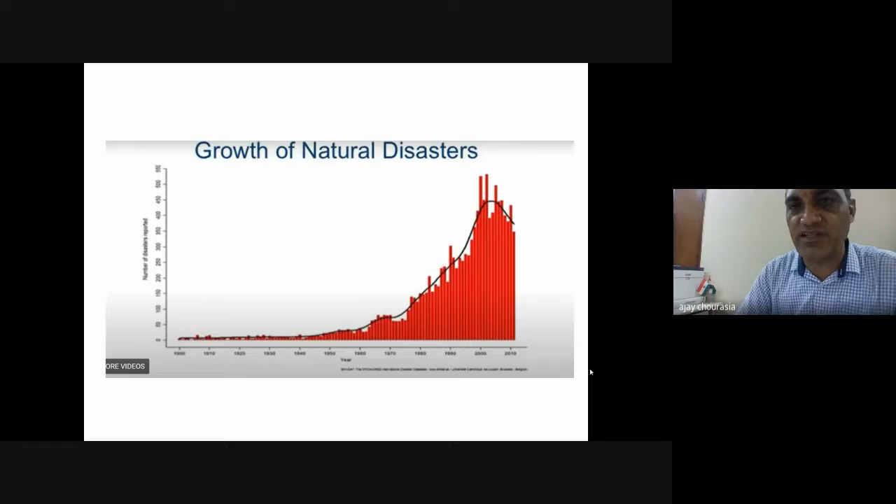In similar fashion, when you see the number of disasters happening over the last century, they are having an increasing trend day by day, and in recent times it has risen phenomenally.

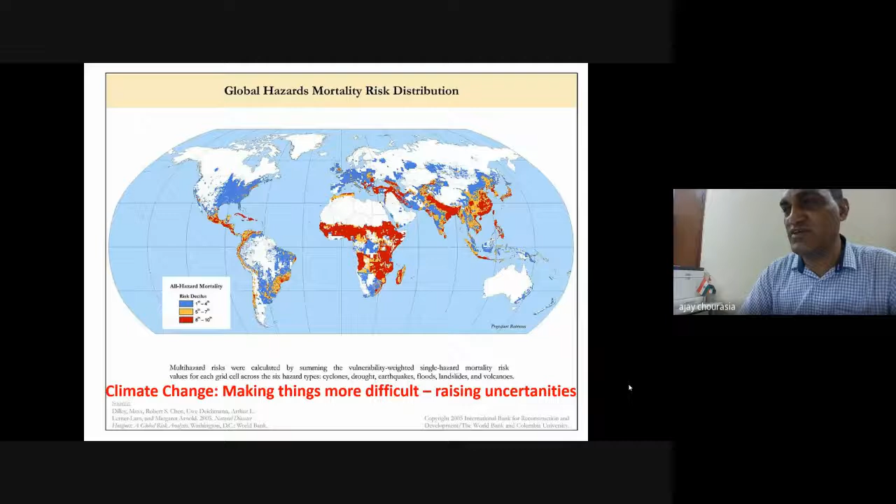In addition, the business loss cost is also incurring to a large extent, and we should focus on reducing all these things. That is where we can jump into climatic change, which is making things more difficult and raising uncertainties. We have to think differently, so that the recovery time, loss of life, loss of property, and economic losses, business losses, should be minimized or made zero.

And that poses a question to us: can we build a disaster resilient infrastructure, one which should be resilient and safe? For that purpose, this lecture or this program series is very pertinent, and will convey to you that if you are strong, you can embrace sustainability in your life, community, organizations, that you can confine the future you are looking for. You can create the future and ecosystem you want to live in. We have all the solutions on our fingertips, we just need the courage.

And if we embrace innovative sustainable solutions, we can mitigate the impact of the next disasters. So all the participants are very good ambassadors for all of us, to pass on the information, whatever has been told in this particular program, to the next generation - that is, budding engineers, that is your students.

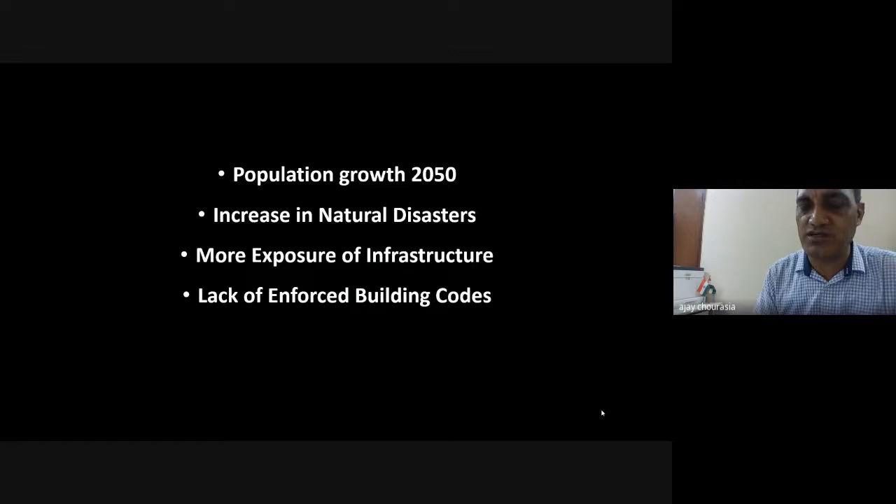So with this, again, disaster is a challenge. There will definitely be an exponential growth in population. There is an increasing trend in disasters, more exposure of infrastructure with time because developments are happening. We are moving from a developing to a developed country, and there is a lack of enforcement of building codes, which is very, very important. Keeping these things in perspective, we have to focus on our disasters.

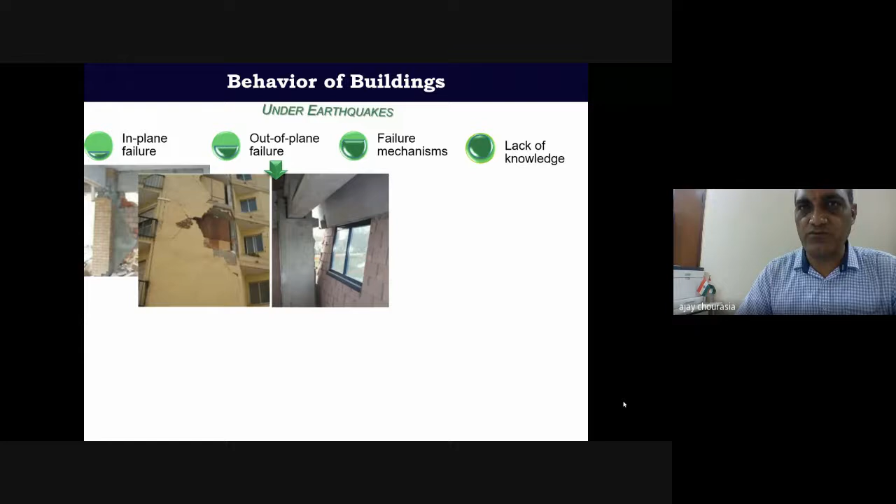In this particular topic, I will be more focusing on earthquake disaster as such. While dealing with earthquake or seismic events, I will be having more focus on masonry buildings. Whenever we have any earthquake event happening, there are common types of modes of failure: in-plane failure, out-of-plane failure. Failure mechanisms will be different, and most often we should see the damage of structural members, and non-structural members like hoardings, parapets, and so on and so forth.

That is basically a cause of concern, putting pressure on us in terms of loss of life and property. That's why there is a need to understand these things very firmly, and I've been entrusted the responsibility to take over this journey with you on masonry buildings.

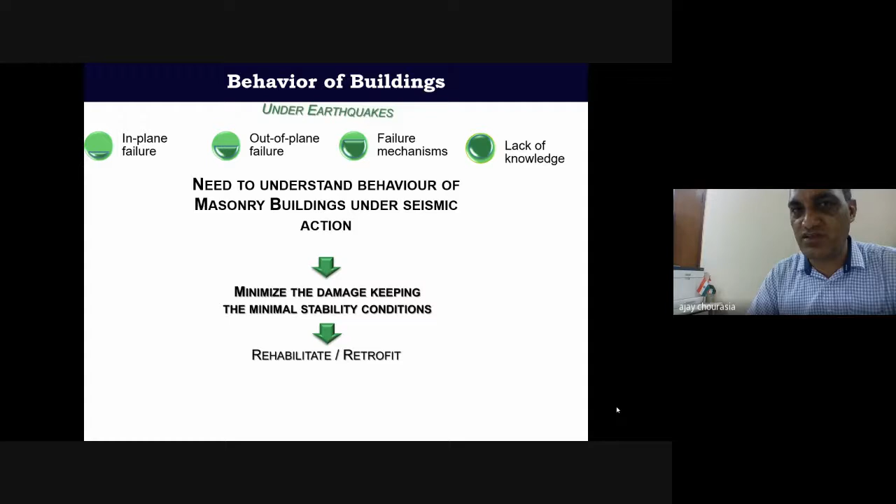Masonry buildings are very important for us because our country has 301 million existing building stocks as per the 2011 census. This is likely to increase by around 20% further if we have a census in 2021. But statistics show around 85% of existing building stocks comprise masonry buildings.

Masonry buildings are well known for their collapse or extreme failures in case of earthquake events. Whenever such events happen, if we talk about a simple typical damage pattern of rural housing, you will come across similar kinds of failures after the earthquake.

The failures may be collapse of parapet, collapse of roofing, separation of wall, shear cracks or diagonal cracks, out of plane failure at mid length of long walls, wall cracking, vertical cracks at intersections, corner failures, and so on. These are the different typical damage patterns which we normally witness after any earthquake event.

Masonry looks to be very simple and well adapted, and we are very accustomed to adopting this technology in our day-to-day construction, but it is posing more of a challenge. It looks simple, but from an engineering perspective it is highly challenging for all of us because it is a heterogeneous material, comprising masonry units, mortar, and reinforcement.

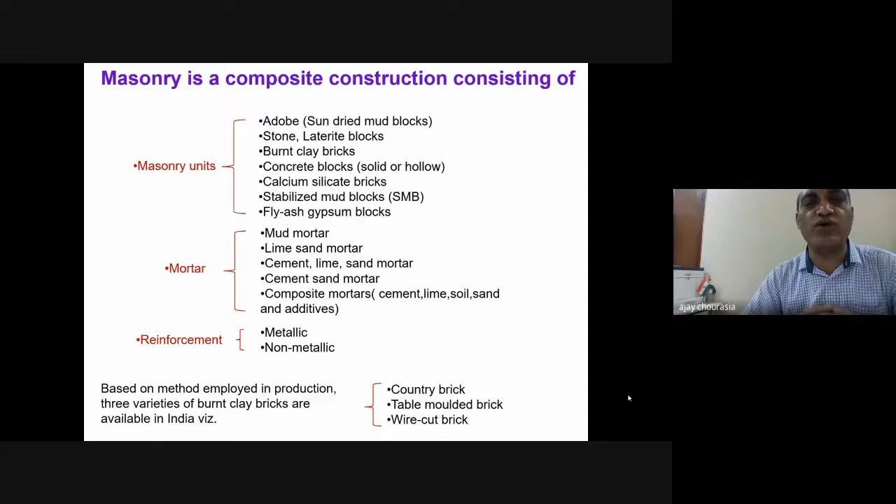When masonry units are stacked one over each other in an array, connected or jointed by mortar, which may be of different material - mud, lime, cement, lime, and so on - it gives birth to masonry walls, and combining all the masonry walls together gives a masonry building.

Ideally speaking, the seismic resistant features recommended by our Indian Standard IS 4326:2013 require providing horizontal bands to give integral box action at plinth level, lintel level, sill level, roof level, gable ends, and eaves level, and so on.

The purpose of providing a horizontal band is to create the integral box action of the entire building. One has to be very careful that this band is provided at one particular level connecting all the walls together, creating an integral box action in the building. Based on its location, it is named as the plinth, lintel, sill, roof, or gable band.

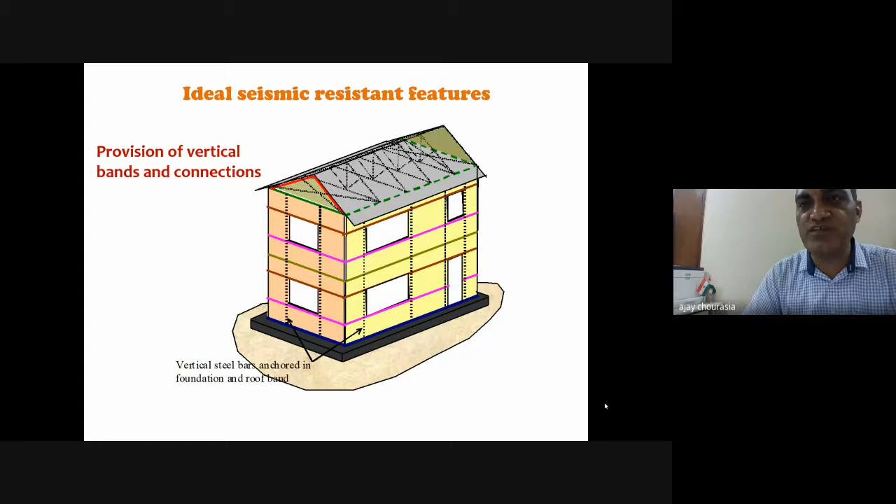When constructing masonry buildings in seismic prone regions - seismic zone 4 or 5 - in addition to the horizontal bands, we need to provide vertical reinforcement, corner vertical reinforcement at all intersections along the openings as a jamb, which provides deformability in our building systems and improves the ductility of masonry buildings.

Having said this, the motivation for this study on confined masonry is that around 85% of existing buildings in our country are masonry buildings, which are heterogeneous in terms of material properties. It's the material properties when we talk about the units, and these properties also vary from place to place, like our accents vary from north to south and east to west.

The strength of units is also changing. The mortar is also changing its properties because it all depends on the locally available ingredients and construction practices.

The vulnerability of masonry buildings has been demonstrated very badly in the past, and that is posing us to look for appropriate technology which is cost effective, seismic resistant, and can make use of locally available construction materials and skills. So for that purpose, we have to look into appropriate technological solutions alternative to masonry buildings, but it could still be masonry, because it is the choice of each and every one of us in our country.

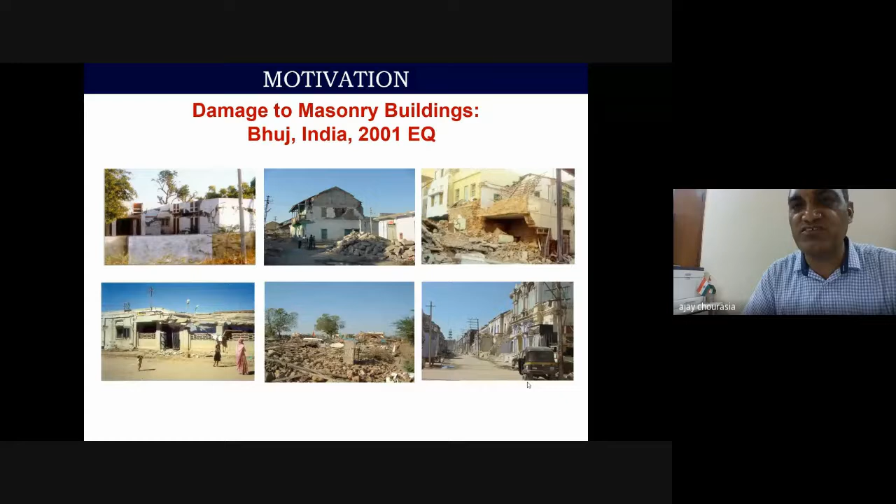When you talk about damage in masonry buildings, to begin with, in the 2001 Bhuj earthquake, total collapse was noticed in most masonry buildings and excessive damage in some buildings. And it's not like RCC buildings have sustained very efficiently either, in our country or abroad.

They also gone into lot of damage, even collapse, because of poor construction practices. That means, if you are saying that RCC buildings are robust and very good at resisting earthquake events, it is not so if not constructed properly, whether it is an RCC building or masonry building.

Before going further in understanding this, or the great insight of seismic activity in masonry buildings, let us try to understand the masonry wall first.

It is my duty, and I will also tell the takeaway for this lecture, which you should convey to your students also: whenever you are dealing with any kind of problem, issue, or subject, you should first focus on what things go wrong in it. Try to identify such wrong effects and then try to strengthen yourself, your project, your activity, your work in that direction.

In the similar process, when you are talking about masonry buildings, let us consider a masonry wall and understand what will happen to it when subjected to seismic events or ground shaking.

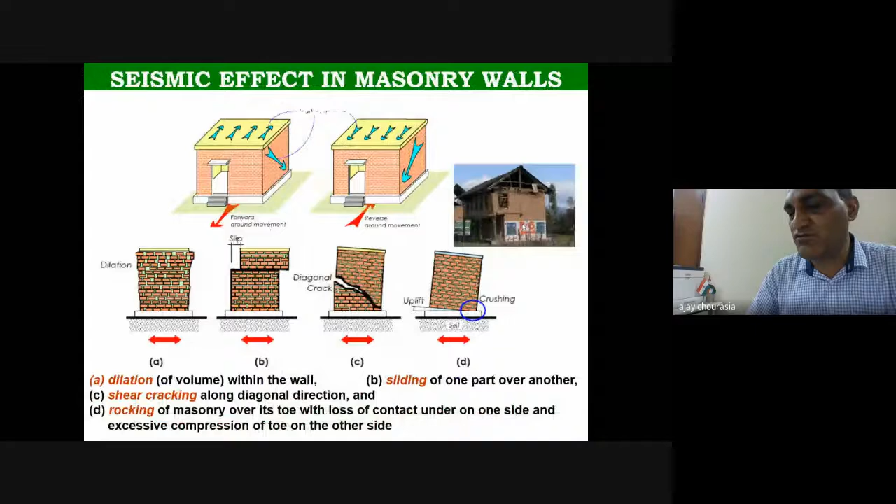As a result, if I take a bulldozer and put a lateral thrust on this, the masonry building will not undergo any kind of collapse or damage. Why not borrow this mechanism from nature and put it into our day-to-day system of construction, particularly for masonry buildings?

Instead of the tree's roots, we can make use of a lightly reinforced RC element, that is an RCC element, like a tie column or bond beam. This can be very well explained from this slide: if you have a wall panel, which is a masonry wall panel, subjected to lateral loading or ground shaking at the bottom.

So possibility of dilation when you talk about may happen, or any kind of distress mechanism as explained in the previous slide can happen.

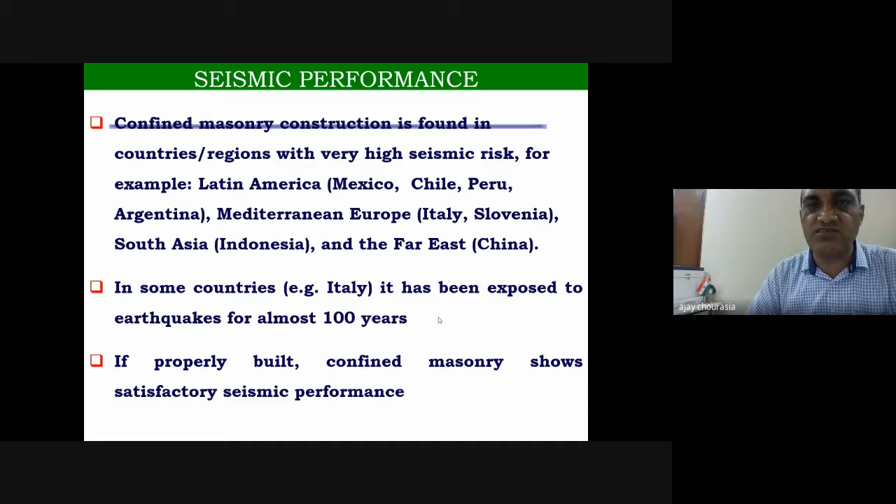With having known certain good and bad things about confined masonry, when you see confined masonry all over the globe, when it has been exposed to various earthquake events, whether in Latin America, Europe, South Asia, or Far East, it has performed exceptionally good if built properly, and that has instigated me to take up this particular R&D activity at CBRI.

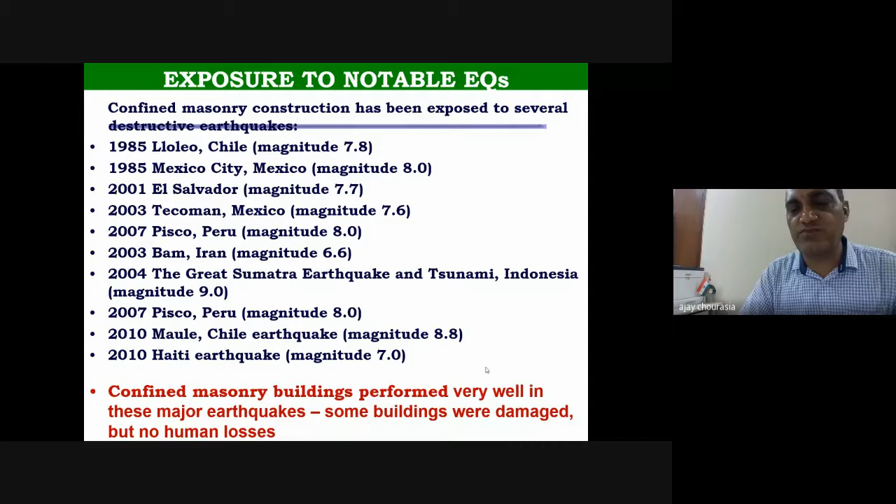At the same time, it was also noticed that when confined masonry was exposed to even extreme events like earthquakes having more than 7 magnitude, it has performed exceptionally good, and that's why when constructed adequately and properly, as has been explained in this presentation, there was very good performance of confined masonry worldwide.

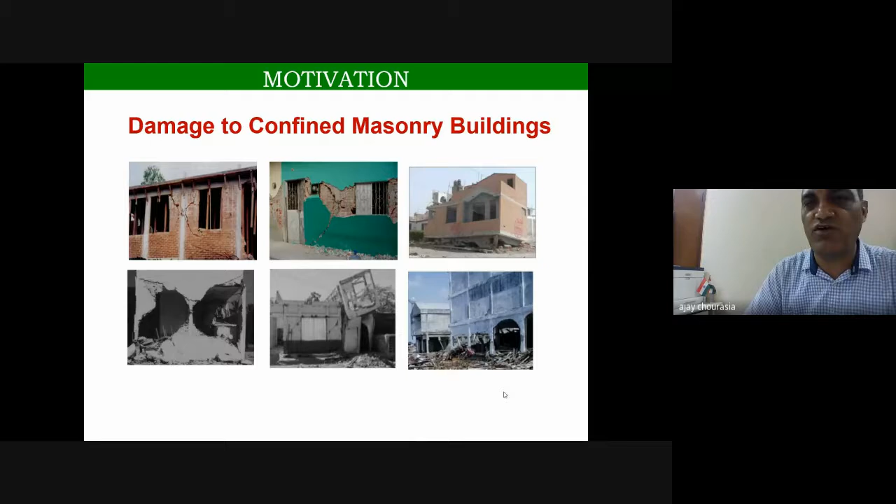But at the same time, in some cases, confined masonry also suffered excessive damage if not constructed properly, if the basic principles of construction of confined masonry were not honored. So there were mixed reactions, mixed results. For that purpose, we need detailed investigation on this subject.

When you talk about masonry, particularly in comparison of confined masonry with RCC moment resisting frame structures - what you see in RCC frame structures is that basically the RC columns and beams are constructed first, then masonry walls are laid at appropriate locations without any adequate connectivity between the masonry and the RC element.

And when it is subjected to lateral loading, shaking, what happens is that these RC elements - the RC frames, beams and columns - go under bending, and as a result there is separation between the masonry walls and the RCC frame, leading to a gap at the corners and creating compression struts and damage in the masonry walls.

In contrast, when you see confined masonry - I will come to the construction sequence later - but the failure mechanism is different since confined masonry is constructed simultaneously. Construction of masonry walls and RC elements is done simultaneously, with good bond between the masonry and RC element, embracing it on all sides.

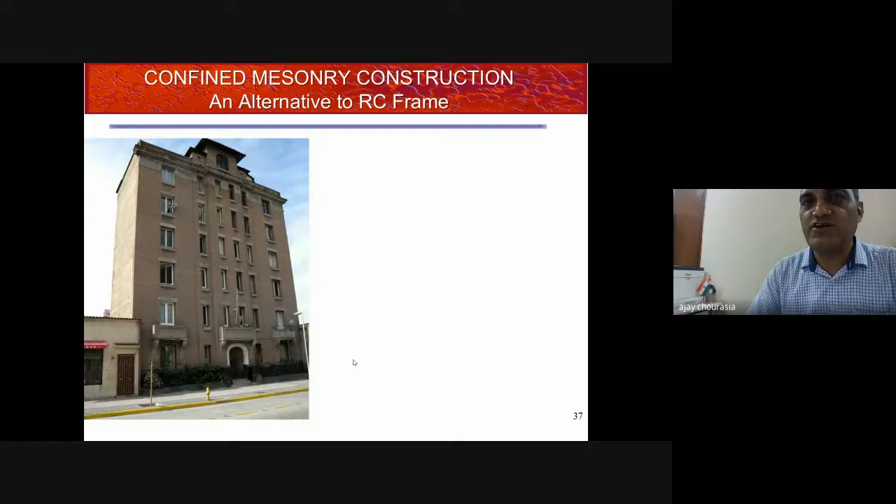So one advantage of this alternative construction technology, confined masonry, is that once constructed it looks similar to an RCC frame building, but the sequence of construction matters - the cost and other aspects are relatively less, but it provides very good seismic performance, or even more seismic performance than poorly built RCC frame structures.

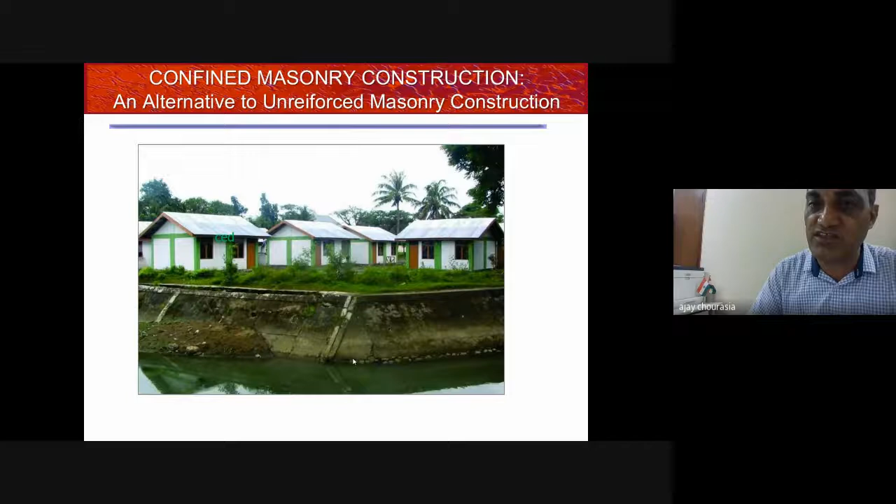So you can construct confined masonry even for 1 story up to 4 to 5 stories in even seismic prone regions, seismic zone 4 and 5. Why am I comparing this confined masonry with RCC frame buildings, which are called high-tech buildings? High-tech, why?

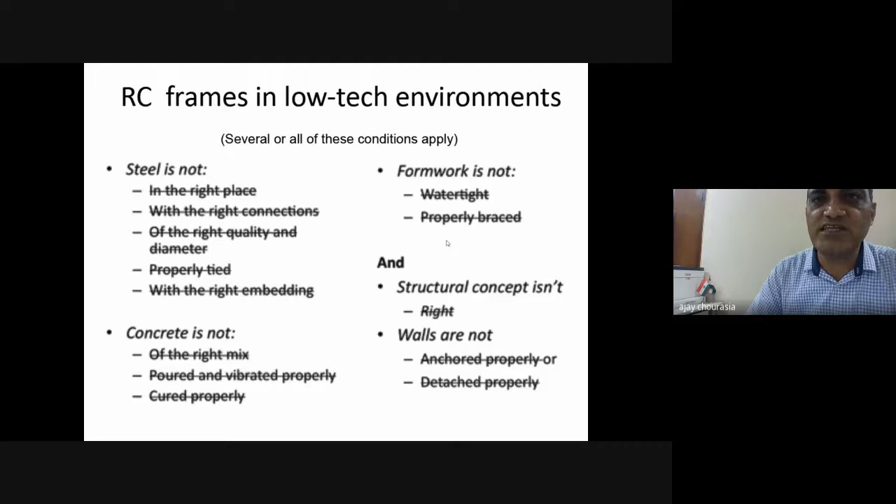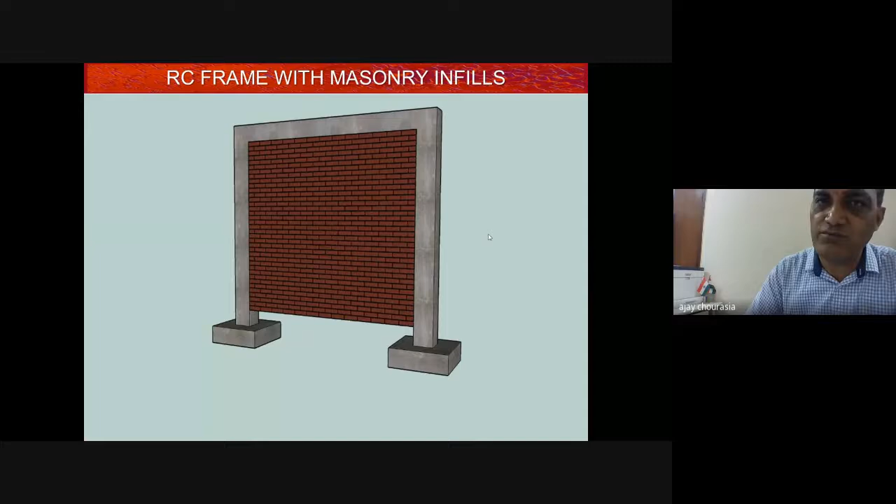In RCC structures, the sequence of construction matters. First the frames are constructed, and then masonry work is done as and when required, and that's how the RCC frame with masonry infills acts on. But there is a slight difference in confined masonry.

In confined masonry, first of all the reinforcements are erected at appropriate locations, then masonry work is done at certain locations up to certain height, maximum 1 to 1.2 meters. Once the masonry work is done up to that height, shuttering is provided at the two faces and concrete is poured. As a result, the entire masonry work is embraced by a lightly reinforced RCC element. It's lightly reinforced because you don't have to calculate the reinforcement as per the procedures given for tie columns or bond beams in IS 456 or other RCC building design codes. That's how you can achieve a good bond between the masonry and the tie column.

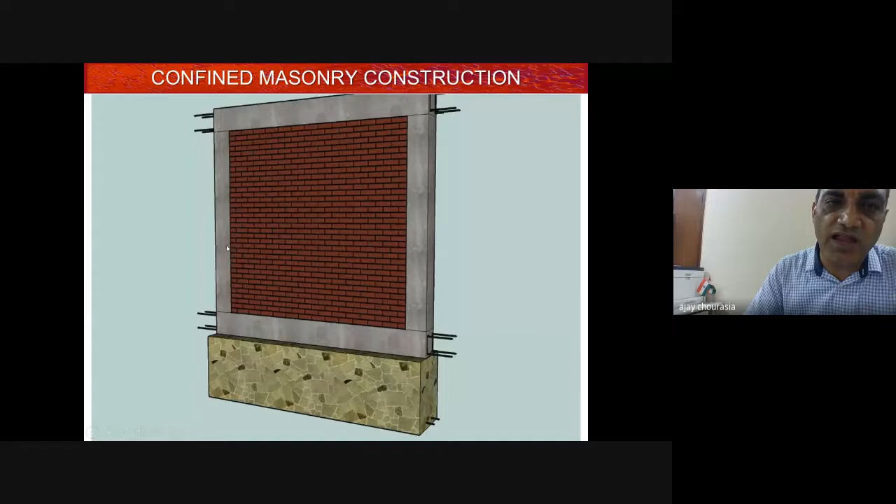Once such buildings are constructed, it looks similar to this particular building. It is neither a masonry building nor an RCC frame building, but is called a confined masonry building. What are the different components involved in confined masonry buildings?

Vertical elements are called tie columns. Horizontal elements are called bond beams, provided at the plinth level and lintel level of the masonry. When you are providing the RCC slab, bond beam provision is not required, and all these bond beams should be resting on the brickwork, obviously, because the sequence of construction demands that.

As I mentioned earlier, reinforcement is erected first, and then you do the masonry work, leaving a groove at the ends. That groove basically ensures a better bond between the RC element or concrete and the masonry works.

When dealing with these grooves, one has to be very careful that the groove should be limited to a maximum of 40 mm. If it is given more, then you cannot do proper compaction, and it may lead to honeycombing. That's why the size of the aggregate should be considered as a limiting factor, so the grooves may range from 25 mm to 40 mm.

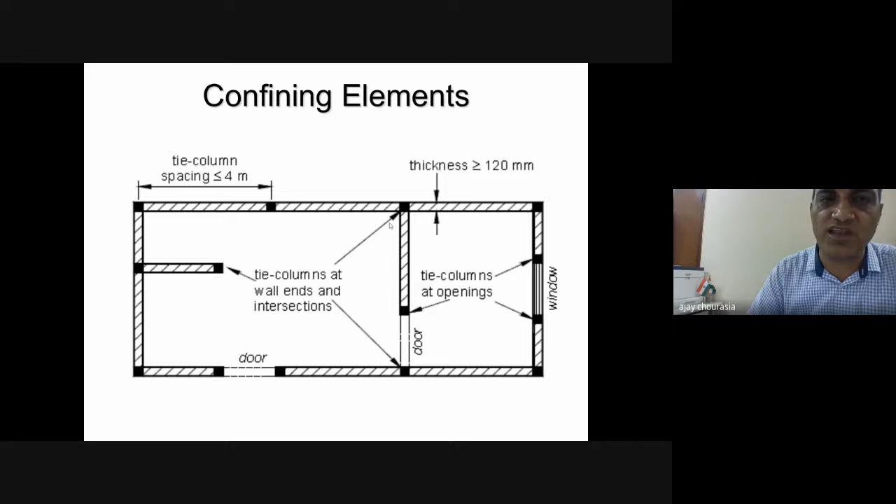Another parameter to consider is the stiffness of confined masonry buildings. For a masonry wall panel, the h/t ratio—h being the story height and t the thickness—should be less than 25, and L/t, the length of the wall panel divided by thickness, should also be less than 25.

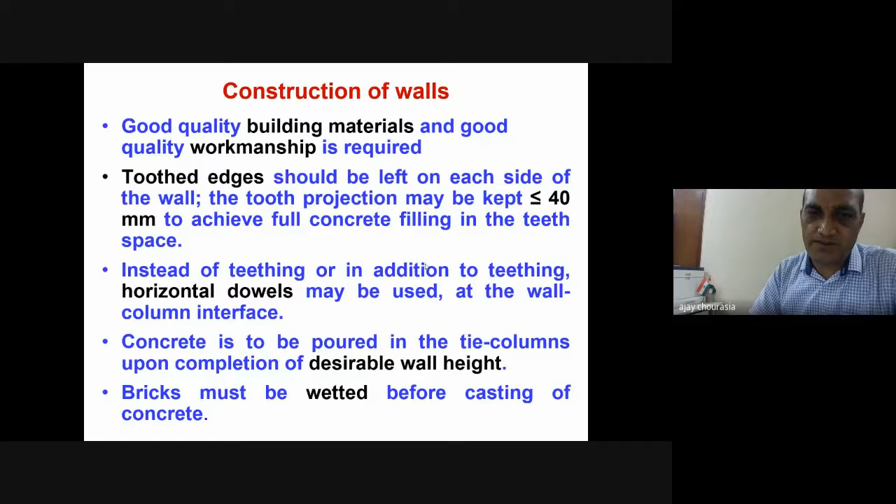For unreinforced or reinforced masonry, the L/t and h/t ratio limits are 18, as given in IS 4326. This is one of the checks you need to do. In summary, confined masonry walls should be constructed with good quality building materials and good workmanship. Toothed edges are required, as mentioned, less than 40 mm, or alternatively you can provide horizontal dowels.

Other general conditions of construction practices for masonry buildings need to be adopted. This is how you provide the shuttering: once the two masonry walls are constructed up to a certain height, maximum 1.2 meters, provide shuttering at the two edges and pour the concrete.

Other detailing: the minimum reinforcement required in the tie column is 4 bars of 10 mm diameter. Similarly for the bond beam, also 4 bars of 10 mm diameter. The lateral ties in columns and stirrups in beams could be 6 mm diameter at 100 mm center to center at the ends, and 150-200 mm center to center at the mid-span. This is from the confinement and ductile detailing point of view.

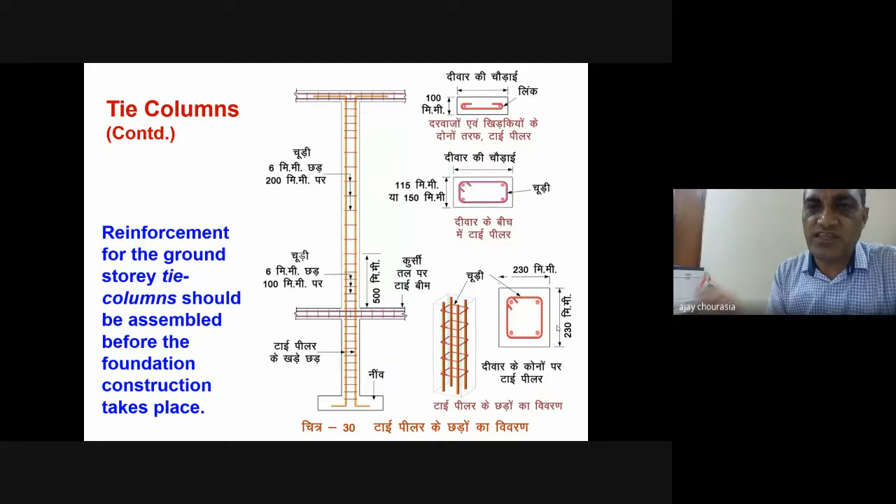Further, the ductile detailing as given in IS 13920, such as bending of hooks by 135 degrees and the length of the hooks, applies here as well.

An important consideration in confined masonry construction is the connection between the tie beam and tie column: the reinforcement of the tie beam should pass through the longitudinal reinforcement of the tie column. This must be ensured. It should not happen that the reinforcement of the bond beam lies outside the longitudinal reinforcement, as that is a dangerous situation.

In seismic events, the concrete cover can collapse, leading to poor bonding between the bond beam and tie column. To avoid this, it is better practice for the reinforcement in the bond beam to pass through the longitudinal reinforcement of the column. Additionally, dowel bars with a leg length of minimum 50 times the bar diameter can be provided, creating good connectivity between two perpendicular walls through the tie column.

Now, to have a better understanding of the behavior of confined masonry, I would like to share a video that will give you confidence in understanding how confined masonry walls, unreinforced masonry walls, and even RCC frame structures with masonry infill behave.

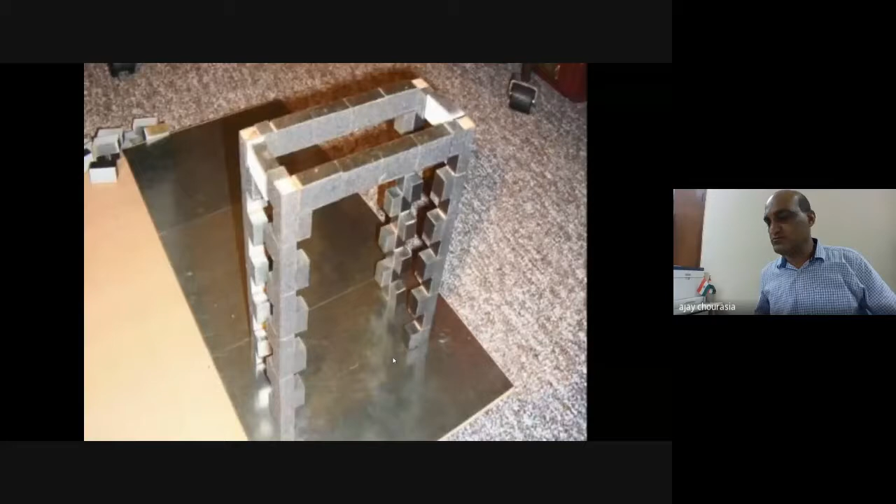Keep in mind that the reinforced concrete beams and columns of a confined masonry system are sized much smaller than those of a concrete moment frame system. So while we'll see the system acting as a moment frame, the small size of the members gives it a relatively low capacity. Let's shake these structures in plane.

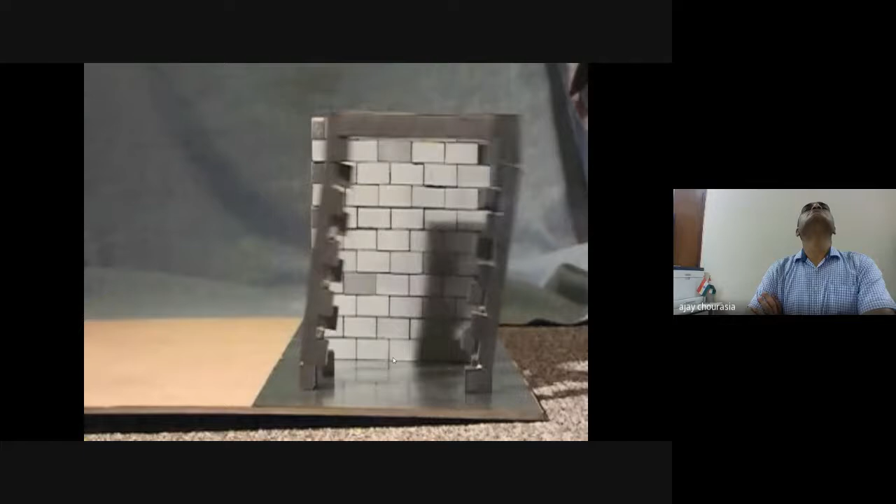We start to notice hinging in the moment frame where the flexural demands are greatest. It's important to note that though the moment frame here is yielding first, that doesn't mean a concrete moment frame can't make a good lateral system. It just means the beams and columns need to be adequately designed to do so, with sizes larger than the typical 15 and 20 centimeter beams and columns of a confined masonry system, as well as other special measures.

In the unreinforced masonry system, we see diagonal cracks forming, shortly followed by the complete disintegration of the masonry wall.

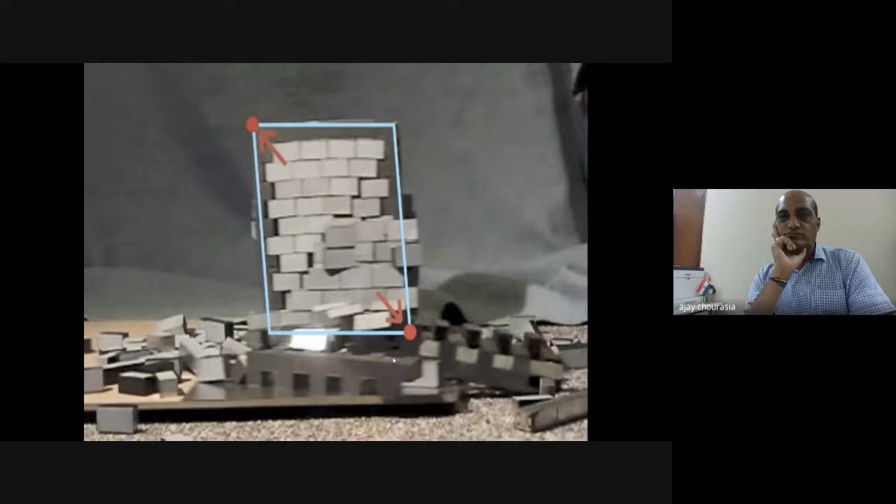In the confined masonry system, we also see diagonal cracks forming in the wall. As the wall deforms, these two corners pull apart from each other, causing tension, and as we know, masonry alone is weak in tension. Similar to the unreinforced masonry system, we see cracks develop, but the confining elements postpone the complete disintegration of the wall. Relatedly, when the wall corners move together, a compression strut forms, which is an important mode by which the seismic force at the roof finds its way down to the ground. It is the combined action of the compression strut in the wall and tension in the confining elements that allow for strut and tie action, which provides a complete load path from the roof to the ground.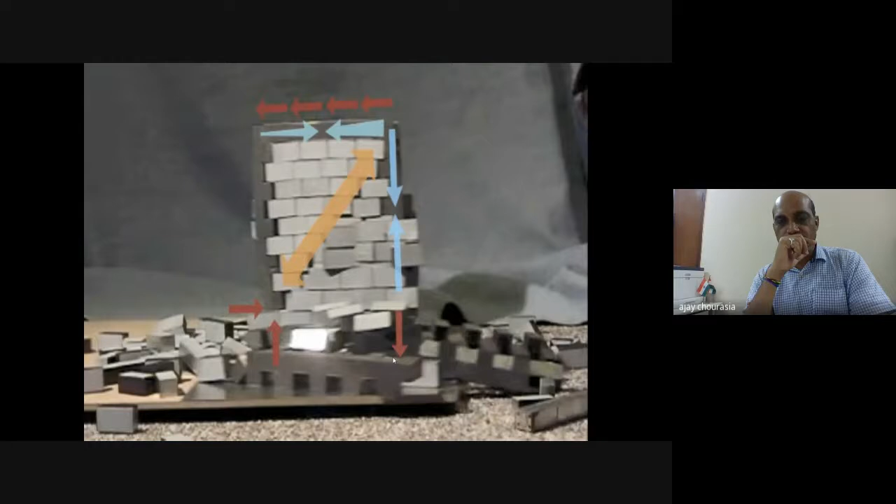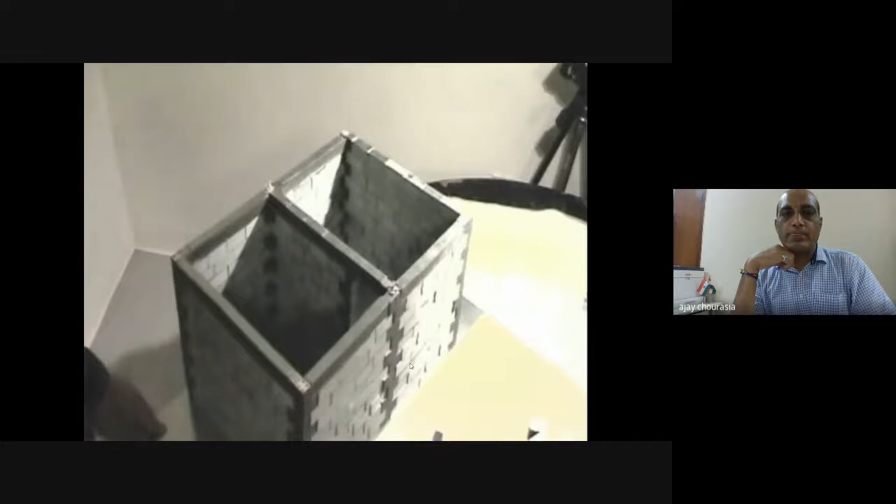We're going to look at the role of the ring beam in the out-of-plane behavior of a confined masonry wall. Say we have a structure with a lightweight roof made of a simple rafter and purlin system, which, unless specifically designed to do so, won't provide adequate out-of-plane support. So for our purposes here, we'll ignore the roof altogether. We'll take this fairly regular setup and shake it in the longitudinal direction, and we'll keep an eye on these two walls, which are identical except for one thing: this front wall has a ring beam on top, which will help restrain this wall out of plane along the top edge. The rear wall does not have this ring beam, so we can make a good guess as to which one will fail first.

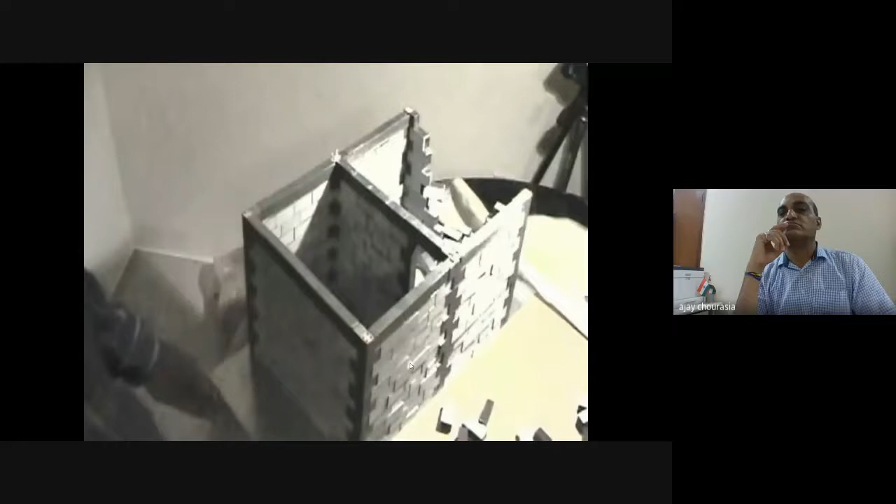Just as we might have expected, the wall without the ring beam supporting its top edge failed first, and we can thus conclude that the ring beam plays a crucial role in the out-of-plane stability of a confined masonry wall.

Now let's take a look at that unsupported wall again from a different angle. From this freeze frame, you can see cracks forming roughly in the pattern of an upside-down Y, starting near the midspan of the unsupported top edge. Of course, a ring beam would have helped prevent this failure.

So with this, I hope you have understood the concept, mechanism, and behavior as a whole of the confined masonry panels.

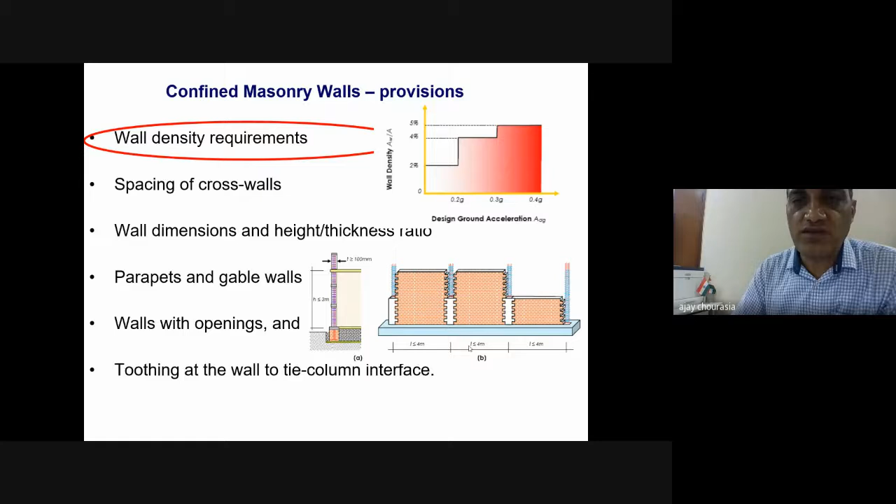Before moving on, I will quickly highlight some design steps. One has to be very careful while deciding on confined masonry construction, though you don't need very meticulous design procedures. First, some parameters one has to check or cross-check include wall density, spacing of the walls, spacing of the columns, h by t ratio and L by t ratio as I mentioned, and then you have to ensure proper connection between non-structural elements like parapet wall, gable ends, and walls with openings. Special attention needs to be paid to toothing at the wall-to-tie-column connection. These are the important provisions one has to consider when dealing with confined masonry.

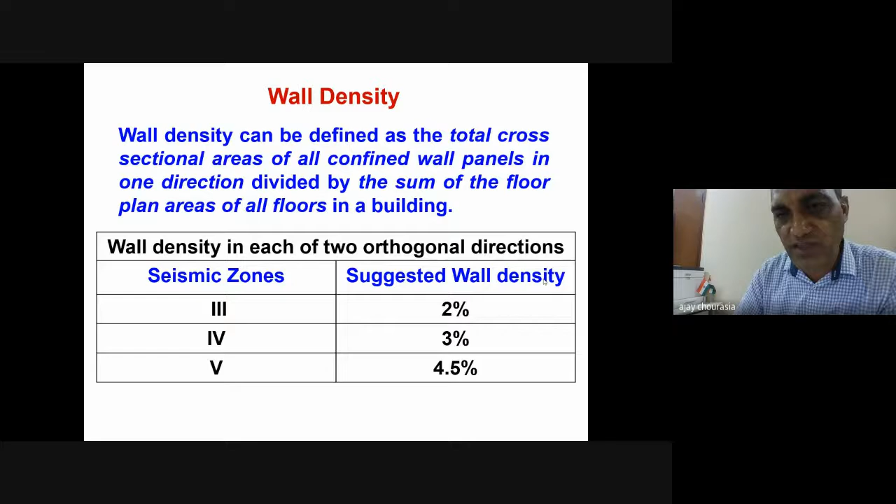Apart from this, other planning and design concepts need to be embedded in the construction of confined masonry, including simplicity and symmetry of buildings in both plan and elevation. In plan, irregular shapes are discouraged, and regular shapes are expected to perform better. If you are dealing with irregular shapes, you need to separate or break them into regular shapes, like in this picture. This was as regards to the plan.

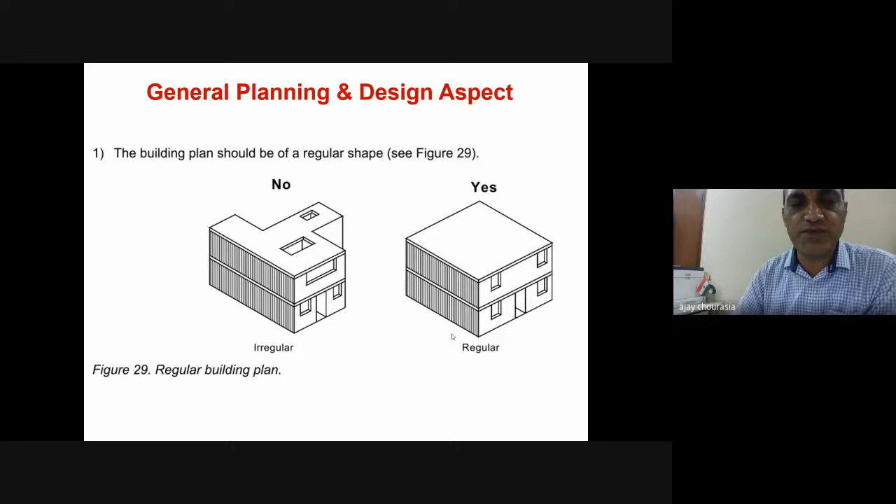Further, regular building plans are always good when constructing confined masonry buildings, because that ultimately improves the seismic performance of the building as a whole.

The building length to width ratio, the aspect ratio, is a very important parameter. The L by W, that is the length of the building and the width of the building, should be less than 4. Whenever the aspect ratio exceeds 4, you have to provide an adequate separation gap between the two blocks, breaking the building into two pieces. This separation gap can be calculated as per the provisions given in IS 1893:2016, as the sum of the maximum displacement between the two buildings. As a thumb rule, consider 20 mm per story as the separation gap. For example, if you have 4 stories, the minimum gap should be 80 mm.

Another important thing is the wall layout. Walls should be placed uniformly and symmetrically in both directions in plan and elevation, because unsymmetrical wall placement may attract more torsional effect. It's not always possible to have perfectly symmetrical wall layouts, but the layout shown on the right of this figure, while not ideal, is much better than the layout on the left. You should aim for a better layout of your buildings in plan and elevation.

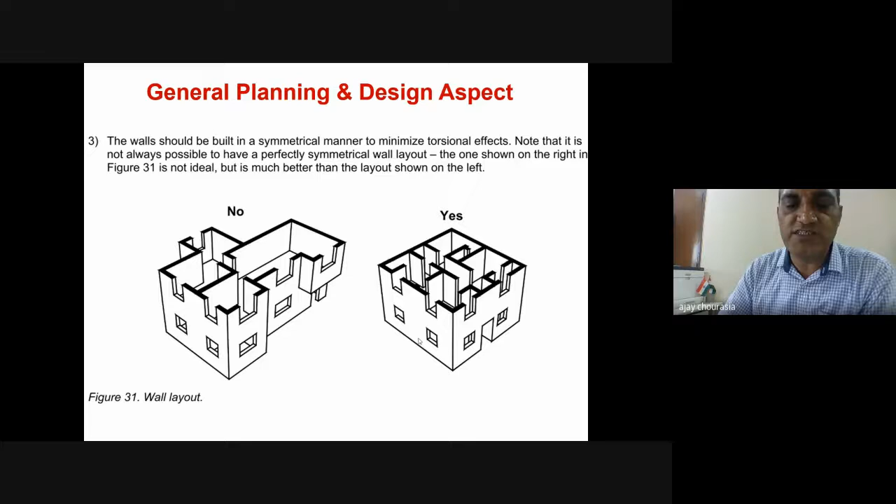You should not provide wall density or wall layout in only one direction just to fulfill the aspect ratio demand; it should be symmetrical in both directions. In elevation too, walls should be one over the other. Floating walls or unsymmetrical wall placements should be discontinued because they lead to an inadequate seismic load path. Seismic forces created by inertial forces at the roof level are transferred through the wall down to the foundations, and discontinuity in this load transfer mechanism leads to an inadequate seismic load path. So this kind of discontinuous wall should be avoided.

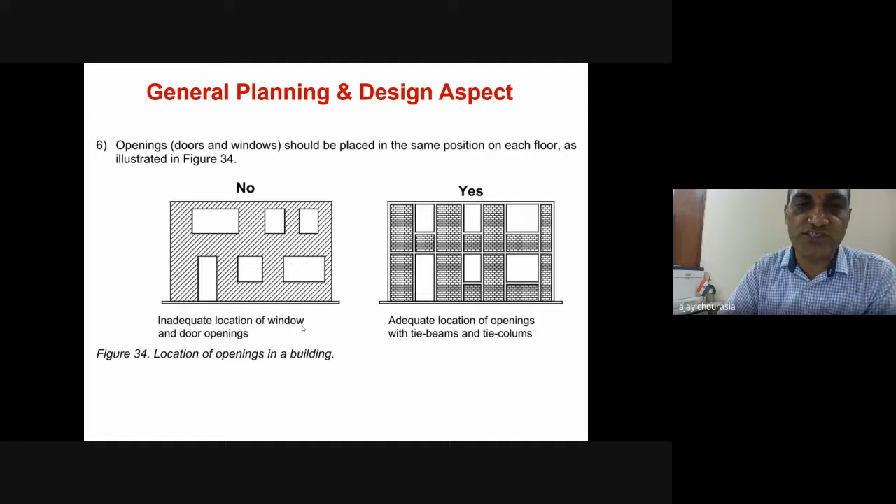Further, openings should be as symmetrical as possible along the height of the building, placed one over the other. They should not disrupt or discontinue your bond beams, so the location of openings should also be given very good attention.

When dealing with sloping or pitched roofs, you need to provide gable bands, that is a bond beam in terms of a gable roof band or gable end if required. Unnecessarily placing masonry in the gable ends will attract more inertial forces, leading to a greater possibility of overturning or collapse. To avoid this, an alternative is to cover such regions using lightweight gable panels, roof-type panels, or roofing sheets.

About the good practices, I have already mentioned that the reinforcement of your bond beam should be passing through the longitudinal reinforcement of tie columns. If not possible, if you are not assured due to certain constraints as you have seen in this particular picture B, you can provide additional dowel bars for that particular intersection. The dowel length should be minimum 40 times the diameter of the bar on each side, but the continuity of the reinforcement needs to be ensured.

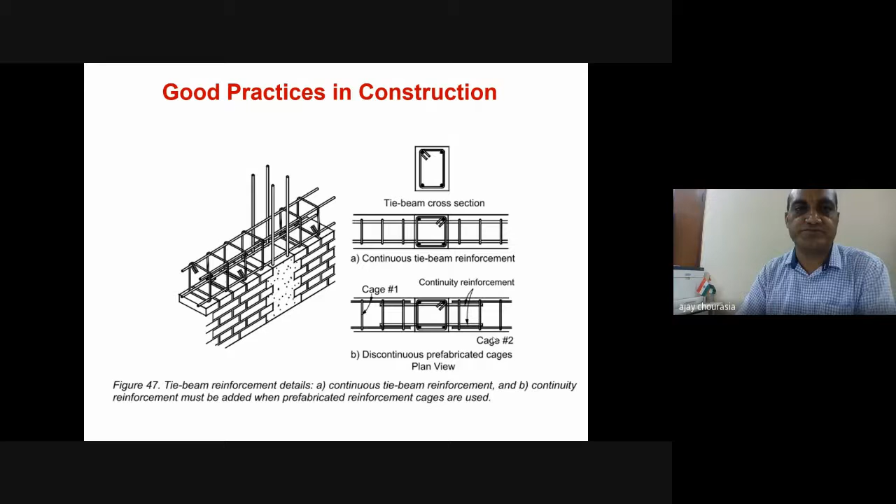Sometimes it may so happen that at the bond beam and tie column intersections, the bending of the reinforcement from bond beam or tie beam to the tie column is not possible. In this case, ideally speaking, you should do the bending of reinforcement by Ld plus 10 db. But if you are not able to do it, a U-shaped clip can be provided having the length of each leg minimum Ld plus thickness of the wall. This U-shaped clip can be a good alternative while dealing with such constraints at site.

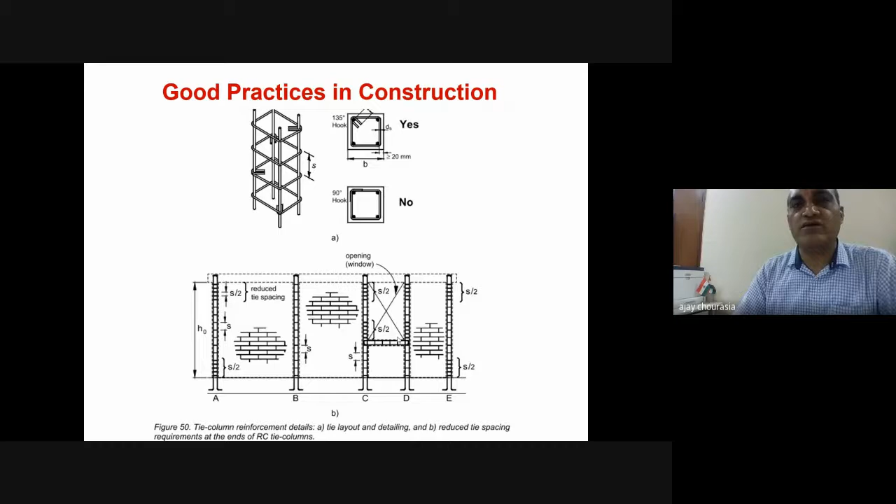Then general confinement detailing, as mentioned earlier, has to be followed in reinforcement confinement in bond beam as well as the tie column. Having known these basic concepts and provisions laid in the codal provisions for construction of confined masonry...

I will take your journey to the experimental investigations which have been carried out, because till now whatever we have seen, we are not confident unless and until we do certain experimental investigation and develop our confidence. So for that purpose, we are consistently dealing with full-scale experimental investigation on masonry buildings. We have started our journey since 2001, and till now we have conducted extensive experimental investigations on full-scale masonry buildings.

To begin with, unreinforced masonry in 2001. After its testing, the building size was 3 meters by 3 meters in plan with 3-meter height, without any earthquake-resistant measures. Once after testing under quasi-static test conditions, the building was damaged. Then it was retrofitted by alternative means by providing MS flat as a lintel level and corner vertical reinforcement by chasing, and the efficacy of retrofitting techniques was carried out.

Subsequently, we again tested in 2005 the full-scale reinforced masonry buildings. The reinforcement detailing was carried out as given in our Indian standard IS 4326. Upon its testing, again retrofitting was carried out, and then we started our investigation into confined masonry in 2013. After construction of the confined masonry building, based on the procedures which have been discussed by now, a full-scale investigation was carried out.

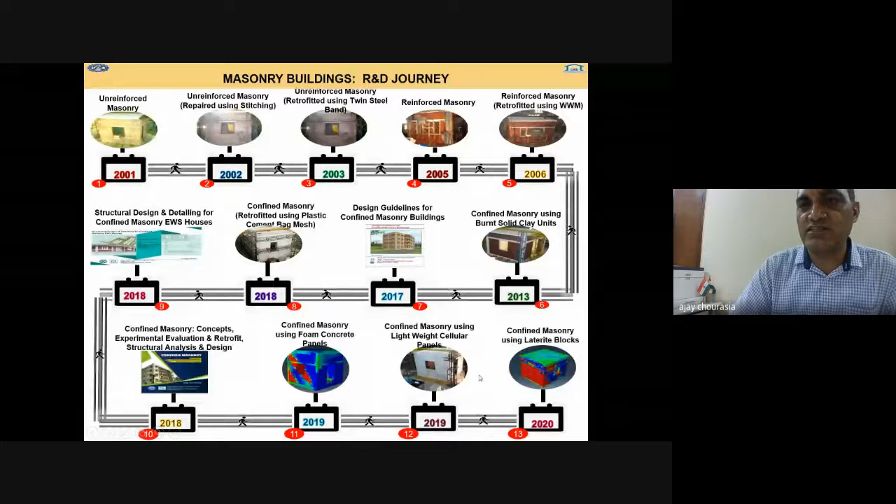In this presentation, I will be focusing on this full-scale investigation on confined masonry buildings. The data which was acquired from this particular investigation was basically utilized for development of guidelines. Upon testing of the confined masonry, the building was damaged. Again, it was retrofitted using sustainable, locally available, low-cost, low-technology, low-skill approaches that have been evolved and applied. I would like to discuss these aspects with you in the subsequent slides on confined masonry.

So this is how the journey on confined masonry started, as I have explained. Again, one most important challenge is that we have a normal habit of borrowing results from the literature or from the international community, but that is not the right approach, particularly in terms of masonry. The reason is that whenever you are dealing with stress in masonry, particularly in compression, as I mentioned earlier, masonry is comprised of units, that is brick or any kind of bricks, and mortar.

When you are dealing with masonry available in the Western world, the masonry units are quite stiffer than the mortar. As a result, the modulus of elasticity of the bricks is much higher than the modulus of elasticity of the mortar. So when subjected to uniaxial compression, the units are subjected to biaxial tensile stresses, while the mortar is subjected to triaxial compressive stresses.

In contrast, in the Indian perspective, the mortar is quite stiff and the masonry units are relatively flexible, so the modulus of elasticity of the brick is quite small compared to the modulus of elasticity of mortar. In this case, when subjected to compression, the stress conditions involve triaxial compression stresses for the units and biaxial tensile stresses for the mortar.

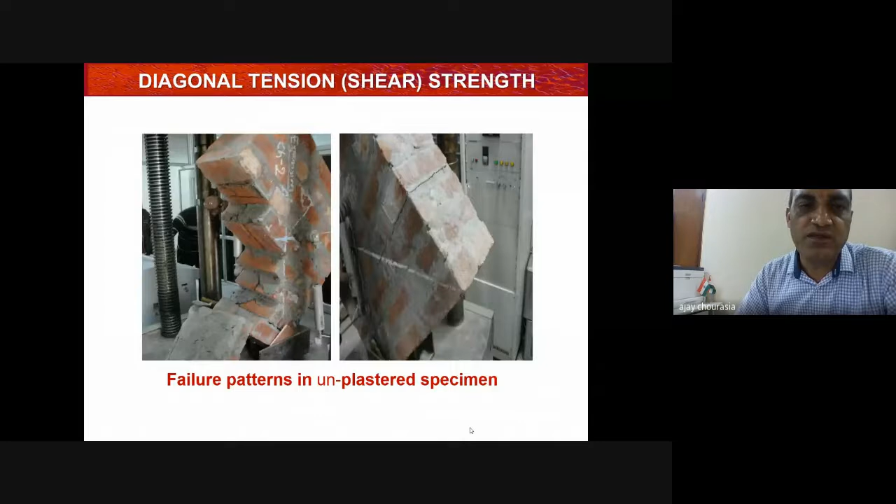When masonry walls deal with lateral loading, it comes across shear strength and shear stresses. For that purpose, it's important to understand shear stress in masonry. We conducted extensive investigation by performing diagonal shear stress tests on wallets of 690 by 690 mm size, with a thickness of 230 mm, as per the protocol given in ASTM E519.

Based on the detailed investigations performed on the prisms and the wallets, the data was captured and linear regression analysis was carried out to establish the relationship between masonry strength and the modulus of elasticity of masonry. After conducting various investigations and comparing data available worldwide and in the Indian scenario, the relationship drawn was EM equals 456 times FM, where EM is the modulus of elasticity of masonry and FM is the masonry strength.

Now it is very important to know how to calculate the masonry strength, which is again a challenging aspect—it is not as simple as concrete. For concrete, normally you extract a concrete core and carry out investigation to know the in situ concrete strength. But that is not applicable in masonry as such.

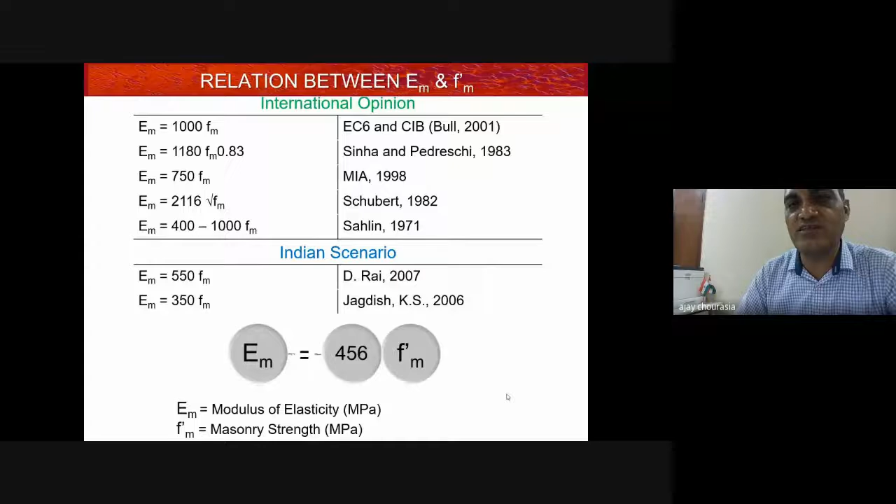What you can do at most is take out certain brick units from existing buildings along with mortar samples and calculate their strength. Having known the strength of the bricks, FB, and the compressive strength of the mortar, FM, we conducted extensive non-linear regression analysis on the data and derived certain constants K, alpha and beta to establish the relationship between the prism strength—the masonry strength—and the brick strength and mortar strength using these factors.

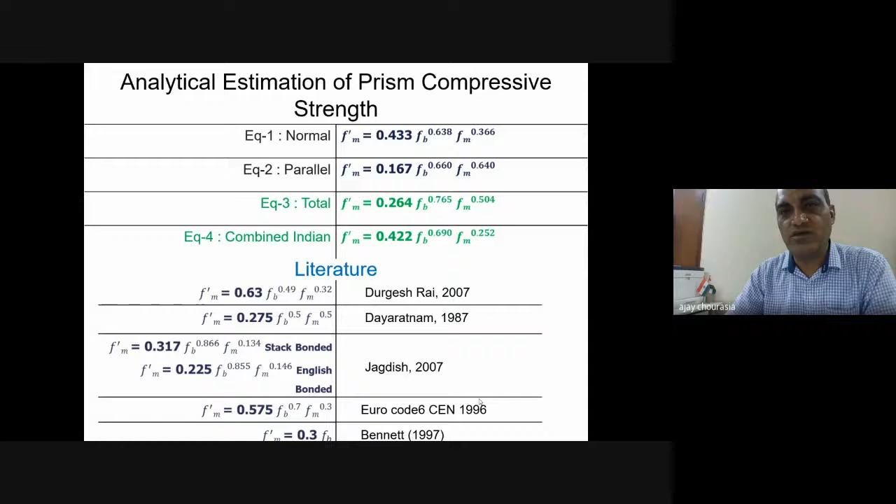This exercise gave rise to the equation FM equals 0.422 into FB to the power 0.69 into FM to the power 0.25. Based on this investigation, these equations have been embedded within IS 1893-2016. The advantage is that you cannot always go and conduct a prism test or wallet test—so having known the compressive strength of units and mortar, which can be identified easily, you can estimate the masonry strength. This is a very beautiful value-addition contribution made by our efforts in Indian standards, for the engineering fraternity at large.

As I mentioned, we conducted extensive retrofitting investigations on unreinforced masonry. This is how the unreinforced masonry, after testing and being damaged, was retrofitted by providing MS flat at lintel level and corner vertical reinforcement, apart from stitching and grouting of the cracks.

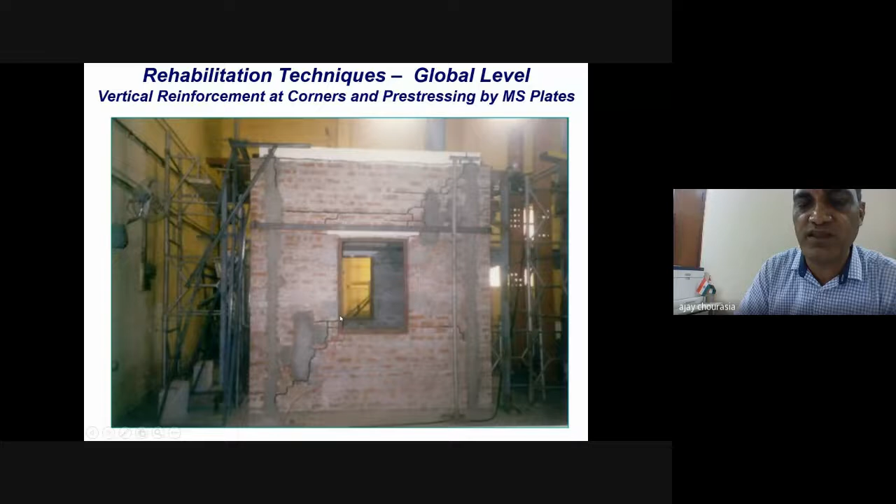Now I will focus on the experimental investigation on a full scale, carried out on confined masonry. I'd like to reiterate the sequence of construction. For this investigation, we constructed confined masonry buildings with a plan dimension of 3 meters by 3 meters and a height of 3 meters.

At all four corners, tie columns with reinforcement of four 10 mm diameter bars were provided. Apart from that, 6 mm diameter lateral ties were placed at 100 mm center to center at the ends and 200 mm center to center at the mid. Then the plinth beam was provided and anchored to the heavy testing floor adequately to represent a foundation system. The masonry walls were then constructed up to 1 meter, leaving a groove at the ends. When the two perpendicular walls were constructed, shuttering was provided in this fashion and concrete was poured.

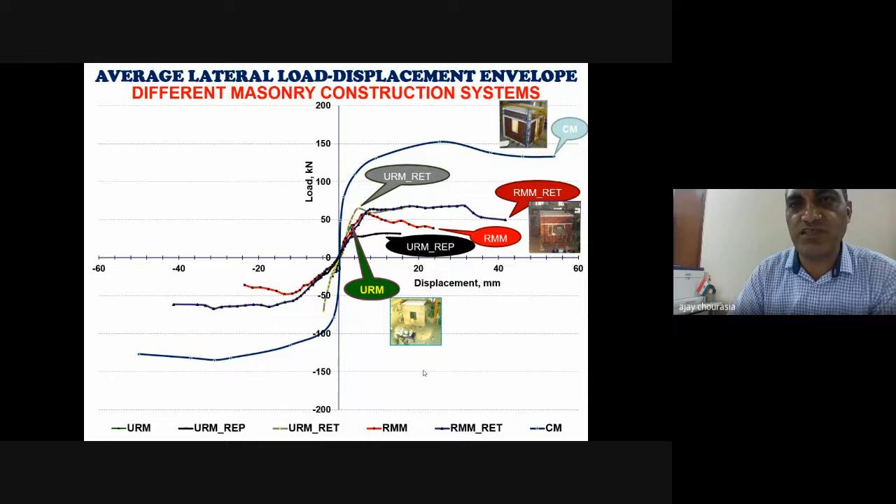Once the data was acquired, it was used to draw the load-displacement curve, which gives information about the initial stiffness, maximum lateral loading, maximum lateral displacement, ductility, and energy dissipation capacity through the hysteresis curve normally obtained from this test.

This slide shows a comparison between all the types of tests we have carried out since 2000: unreinforced masonry, reinforced masonry, and confined masonry, along with retrofitted and repaired unreinforced and reinforced masonry specimens.

All these tests have shown that confined masonry performed exceptionally better in terms of lateral load resistance and maximum lateral load resisted, for similar geometry and material properties of the masonry buildings, with only the typology being different.

This gave us a very good platform for comparing the different building systems: unreinforced masonry (URM), reinforced masonry (RM), and confined masonry (CM).

The comparison showed that confined masonry resisted 152 kilonewton lateral load and a maximum displacement of around 54, in contrast to unreinforced masonry, where the maximum load resistance was hardly 32 kilonewton and displacement was 10.

Similarly, the initial stiffness was also quite large compared with unreinforced and reinforced masonry. In short, comparing the results gives confidence that confined masonry is a promising technology which enhances seismic performance through small interventions.

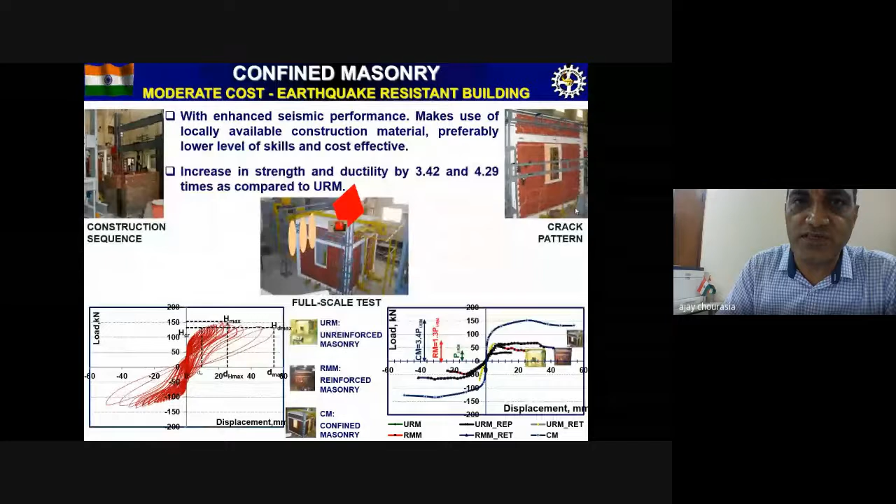For this purpose, definitely there are right technologies available, but we want to rely on alternative materials which are locally available, economical, and do not attract more skills in implementation. So for that purpose, we have opted for 6 different options: welded wire mesh GI, chicken mesh, nylon mesh or mosquito mesh, industrial geogrid mesh, polypropylene bands, and lastly a very innovative idea—whenever you are conducting construction, you are utilizing cement.

So all these alternative options we have tried to adopt for the retrofitting of this building. For that purpose, a detailed investigation was carried out. All these alternative materials were utilized for strengthening of unreinforced masonry prisms and wallets. Prisms were taken having the size of 220 mm by 410 mm, as per 4326 provisions, and the masonry wallet 670 by 670 as per ASTM E519.

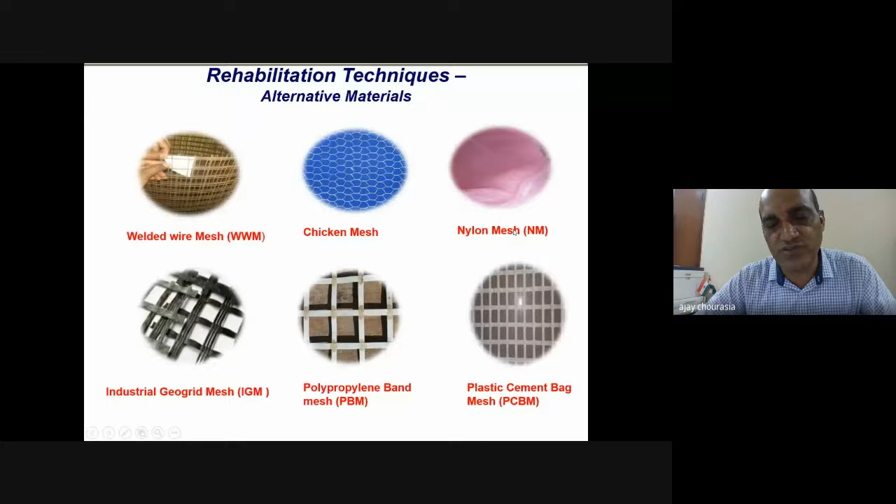One set of control specimen was created for both options—control specimen meaning unreinforced masonry—and different sets were created using all these different alternative materials. The jacketing using all these materials on the unreinforced masonry prisms or wallets was then plastered, embedded within the plaster of 1:4 cement mortar, and subjected to uniaxial compressive loads to understand the compressive strength, stress-strain behavior, and damage pattern.

The axial load was applied at the rate of 4 kilonewton per minute, a very slow axial load, and this is the typical damage pattern which was noticed—basically the spalling of the plaster, separation of the plaster and the jacketed material, and in a few cases the crushing of brick units also was noticed.

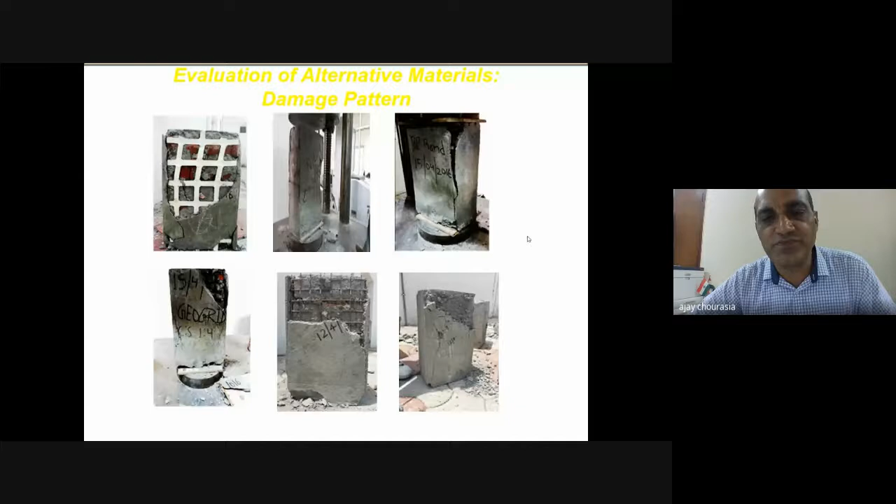The response was measured in terms of load, strains, and deformation. A comparison was made by means of a compressive stress-strain curve for masonry prisms for all the different alternative options, which showed that unreinforced masonry has a very poor compressive strength of around 3.2 MPa.

In contrast, the wallets after retrofitting using plastic cement bag or welded wire mesh jacketing enhanced the compressive strength to 6.2 MPa and 6.1 MPa respectively. That means the plastic cement bags and welded wire mesh performed exceptionally well compared with the unreinforced masonry and other alternative options, and could be considered an approach for strengthening or improving the compressive strength of unreinforced masonry buildings, walls, or wallets.

Further, the investigation was carried out to assess the shear strength of the masonry using a protocol given in ASTM E519, by conducting diagonal shear tests on masonry wallets. Apart from the control specimen, all 6 different options were again carried out, plastered, and tested. The response was measured by means of strain gauges and LVDTs, provided perpendicular to the direction of loading.

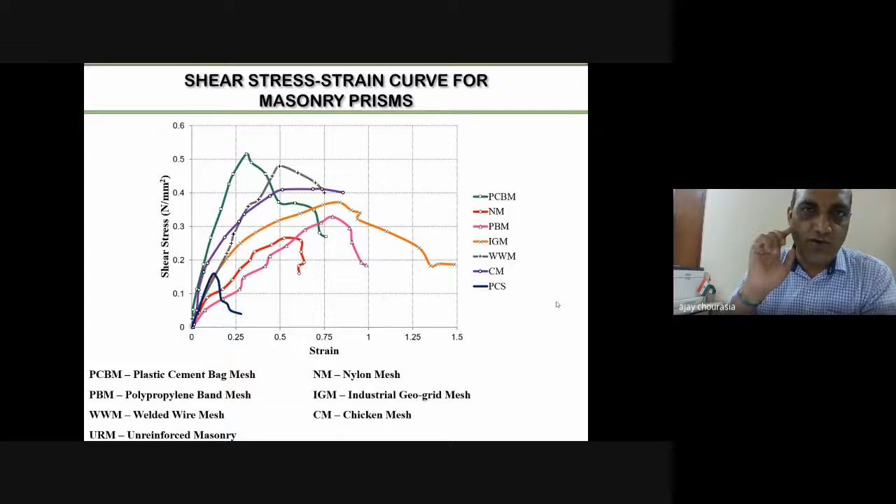Based on that, it strengthened our view that in these preliminary tests, we have substantially enhanced the strength of masonry using the plastic cement bag jacketing approach—so why not adopt this particular approach for further investigation and retrofitting of damaged confined masonry models. The basic reason for choosing this option was the properties of plastic cement bag mesh: high compressive strength and shear strength after jacketing, flexible, economical, reusable, non-corrodable, minimum thickness, and adequate bonding with masonry. Keeping these features in mind, further investigations were performed.

Before going into this investigation, in masonry I would like to mention that most of the times you have to re-engineer or innovate the things. In South India in particular, when you see the burnt clay brick unit, we have performed this entire exercise using burnt clay solid brick units as the masonry units.

In South, the compressive strength of units is relatively very low, hardly between 3 to 4 MPa, which is desired by the code. If you are coming across a large amount of round boulders, you can make use of these in construction or in manufacturing of brick units as well.

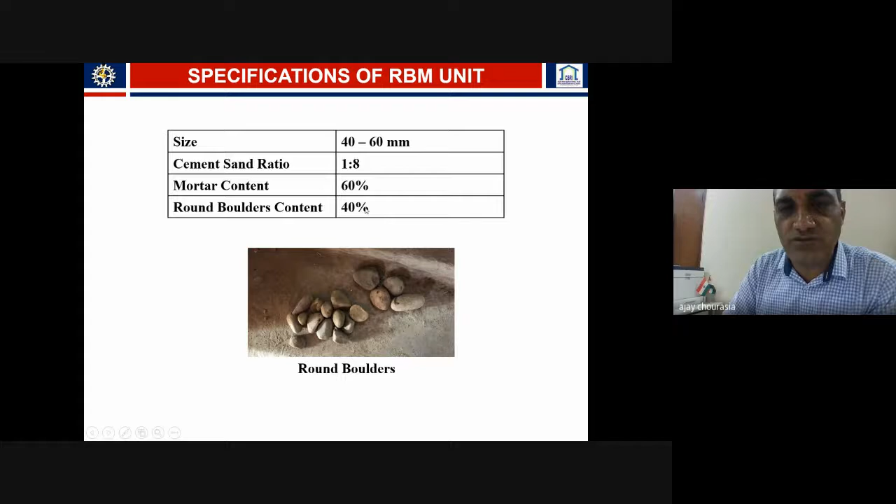You can consider round boulders of 40 to 60 mm size, embed this in 1:8 cement mortar, having a mortar content of 60%, round boulder content around 40%, and around 5% cement content. Put this particular mortar and embed 3 to 4 stones in the heart of this particular unit, within the mortar, and then do the vibro compaction technique.

Using this compaction technique, you can manufacture brick units using round boulder mortars embedded within weak cement sand mortar.

After doing this exercise, we compared different options of units - burnt solid clay brick units, autoclave aerated concrete (AAC) units, and RBM units of equal size. When we extracted the engineering properties in terms of water absorption, compressive stress, dry density, modulus of elasticity, Poisson's ratio, shear strength, and shear modulus, we observed the innovation has taken its edge, apart from the cost aspects.

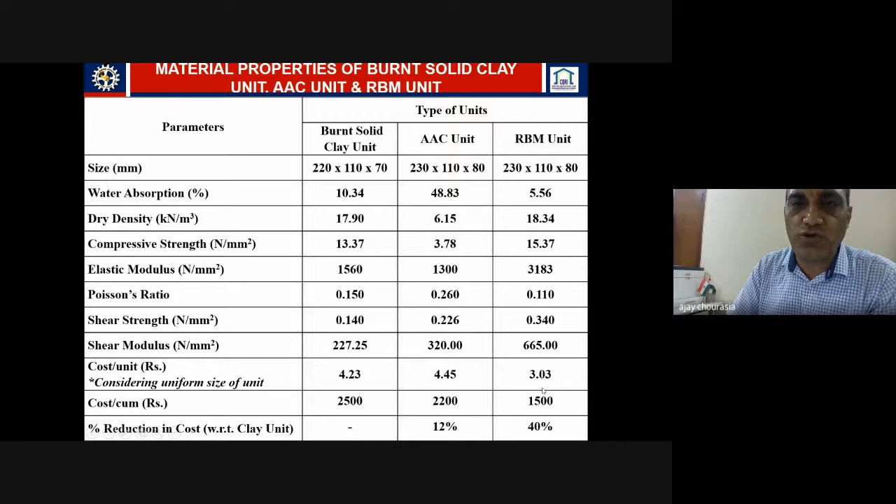This particular RBM unit has substantially good engineering properties compared with burnt solid clay units and AAC. Apart from the cost, there is around 40% reduction in the cost of units, making it a very techno-economical solution for construction of masonry buildings instead of solid burnt clay brick units. By doing so, you are minimizing the impact on environmental sustainability in the construction process.

Now, I would like to take your journey to the strengthening of the damaged confined masonry building. This is the confined masonry building which was damaged after conducting the test as described so far.

Upon doing so, a cement slurry was grouted within the cracks, and stitching of the cracks by plaster was carried out. Subsequently, the entire damaged building was provided with application of plastic cement bag mesh on all sides in both directions. It was pasted.

It can be pasted either by means of epoxy or by nailing, and embedded within the plaster of 1:6 cement mortar having thickness of 15 mm maximum. This is the retrofitted confined masonry model.

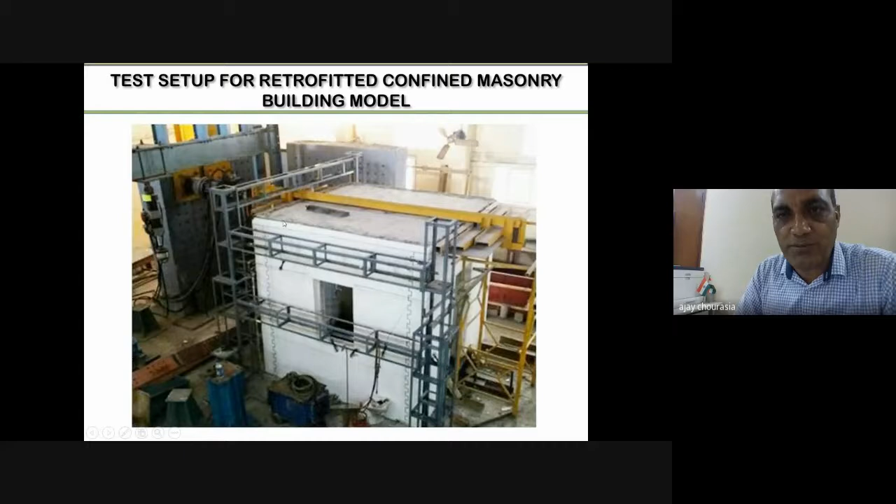The similar experimental protocol was applied to conduct the test on this particular model, and at higher loading we could see the damage pattern similar to that seen in the confined masonry, in terms of cracking and spalling damage.

We have normally seen the cracking generally starts from the corner of the openings in the in-plane wall, and it marches towards the corners, with these cracks passing mostly through the mortar joints. Sometimes it is passing through the masonry units also.

At higher loading, the crushing of the concrete at the toe region and bending of the longitudinal reinforcement of the column take place.

This is the typical damage pattern which was noticed after the retrofitted confined masonry model was put under lateral displacement controlled cyclic loading under quasi-static condition, meaning under a very low frequency. This type of crack pattern observed was similar to the crack pattern we normally see after any earthquake event in a realistic state.

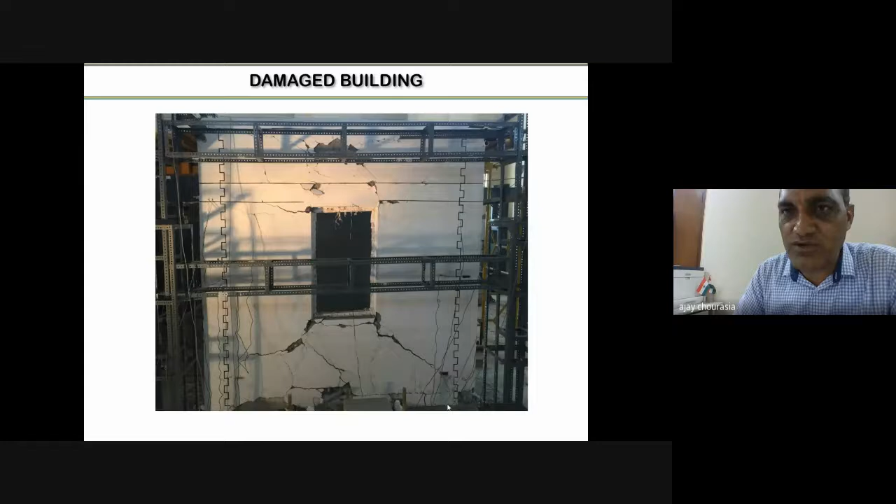We could achieve a realistic scenario through the experimental investigation by adopting proper experimental protocol, and the damage data information was recorded in terms of deformation strains by LVDTs and strain gauges. The data collected was analyzed and put for comparison.

In addition, the increase in lateral strength by around 422% as compared with the unreinforced masonry model was noticed. The confined masonry retrofitted model attained a maximum loading of 192 kilonewtons, as against 34 kilonewton for URM and 152 kilonewton for confined masonry.

Similarly, the maximum deformation capacity attained in the retrofitted confined masonry model was around 74 mm, in contrast to 54 mm in CM and hardly 9 mm in URM. This again built up confidence that good comparison has been seen in terms of strength, stiffness, ductility, energy dissipation capacity, and other injury and damage patterns, giving total confidence on confined masonry and the retrofitting techniques which we could evolve through this experimental investigation.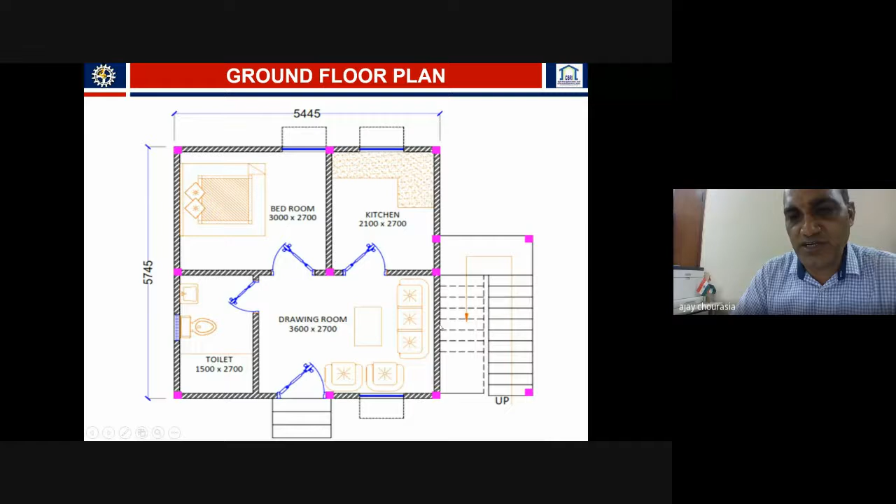In this picture, you can see a simple plan of an EWS, economically weaker sections house, with all detailing. At the planning stage we have provided the tie columns at appropriate locations as per the provisions discussed in this section.

In this case we have provided under-ream pile foundations, 300 mm dia pile, 3 meters long, since the construction has to be proposed on black cotton soil. The P1 represents the pile locations and pile caps, and GB is the grade beams provided at the plinth level.

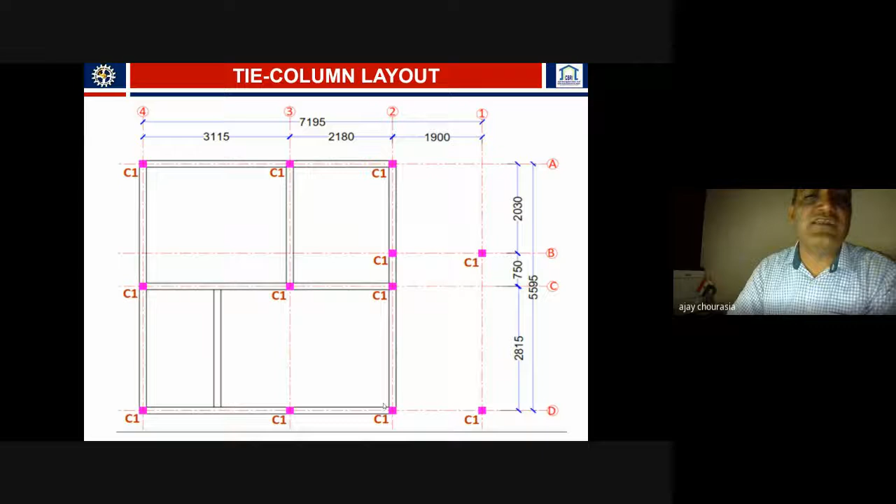Subsequently, the tie columns, shown in pink as C1, were provided at all the corners and intersections, having a size of 230 mm by 230 mm, with wall thickness also 230 mm. The columns are provided with 4 bars of 10 mm dia, and other reinforcement detailing as discussed in this lecture. This is the typical detailing provided for the piles, pile cap, tie column, and bond beam.

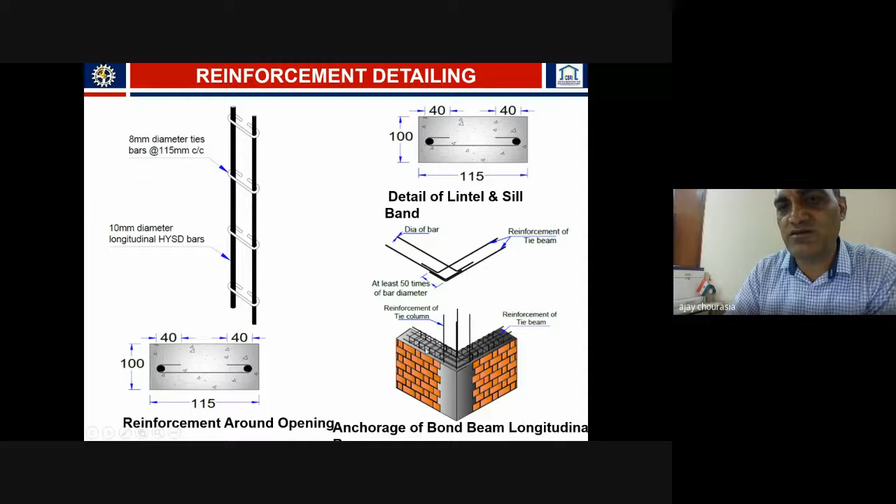In addition, around the openings, instead of providing a tie column, we have provided only two 10 mm dia bars and 8 mm hooks at 115 center to center, as you can see, from cost reduction considerations. Further, the other detailing discussed has also been taken into account.

Afterwards, the construction was carried out in the similar fashion as discussed. Then RCC slabs 115 mm thick were provided, to provide ease in designing of the RCC slab. This is very typical, and we want RCC slabs to be designed even by a non-engineer, or a person with reasonable education qualification.

For that purpose, we have evolved a reinforcement ring for design of the slab. In this, different options have been given. You simply rotate the ring and bring it to the appropriate location, indicating the minimum size of your rooms in width and length.

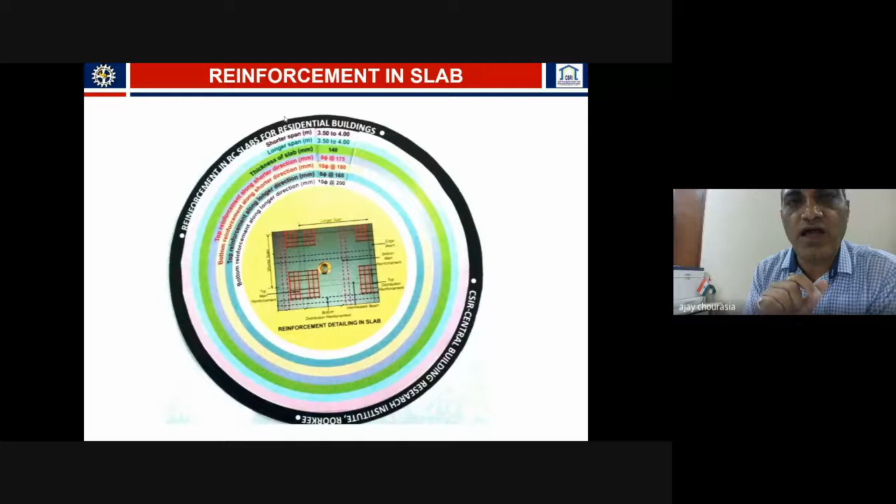After adopting the appropriate slot, it gives information on what should be the thickness of the slab, and what reinforcement should be provided along the shorter direction, the longer direction, and as negative reinforcement. This contribution makes it easy for even a mason to select appropriate reinforcement detailing for construction of RCC slabs.

This further minimizes unnecessary extra reinforcement, which normally you see in construction when you visit sites. People provide extremely large slab thickness and more 10-12 mm dia bars even for a 3 meter span in a residential building. That is not correct.

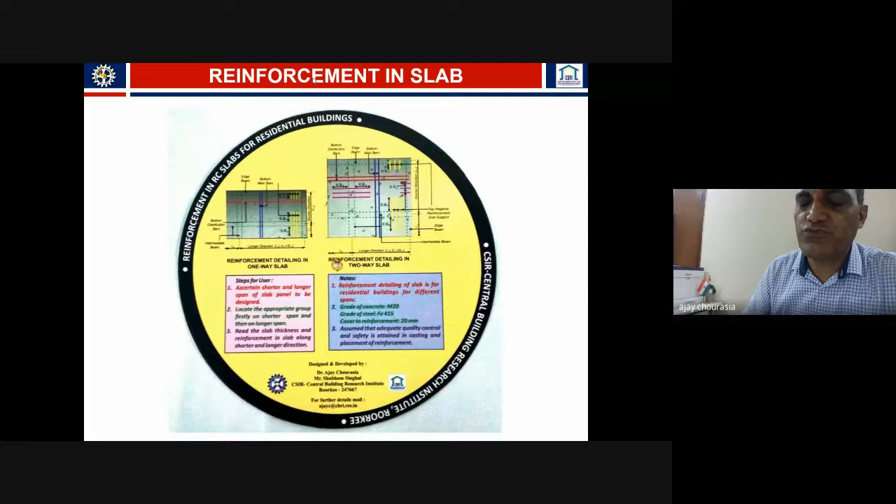This is a great advantage, and we can contribute through this to the economy and sustainability of the country as a whole, by selecting the appropriate design approach and reducing the use of cement, concrete, and steel in the construction process, without compromising quality and safety.

Now you can have a quick look at the pictorial view, the construction methodology to be adopted for confined masonry buildings, which is cost-effective and seismic resistant. Here I'm showing the strip footing foundation we are providing for the construction of confined masonry building. After laying the PCC, you have to provide the tie column reinforcement.

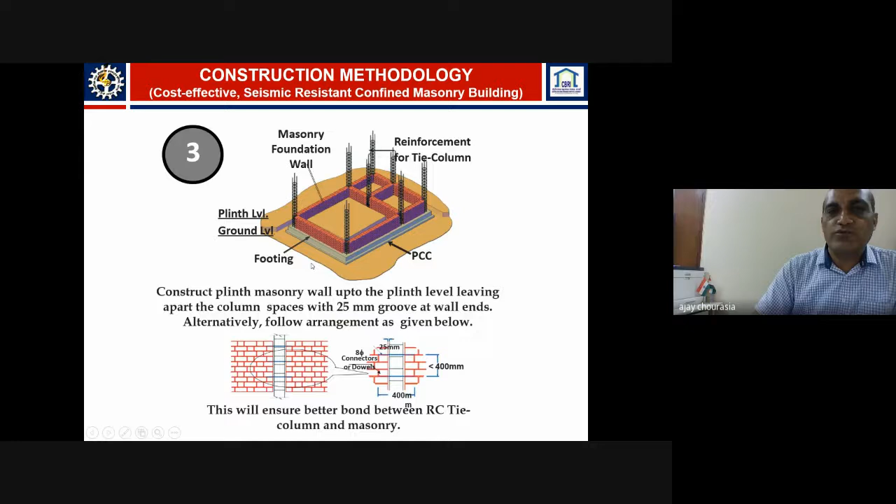In addition to the appropriate foundation system, you provide masonry up to a certain height by leaving the grooves, then do the shuttering and pour the concrete, followed by the bond beam reinforcement, and then continue the masonry work.

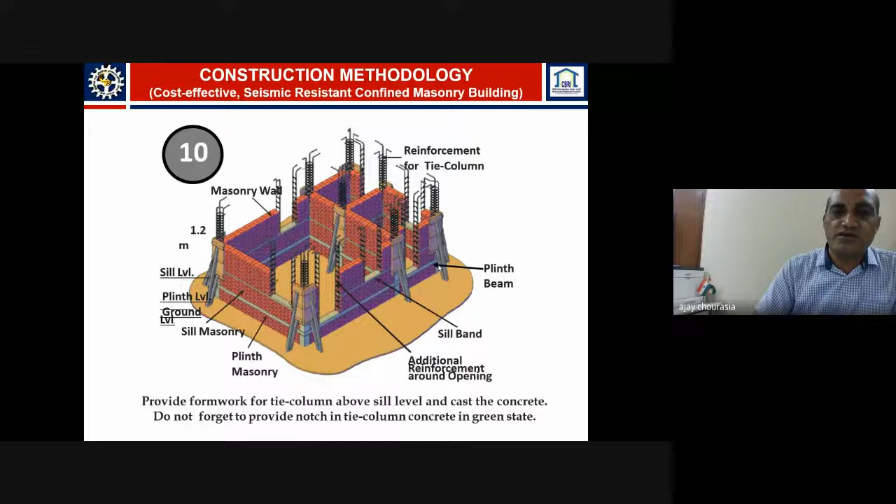Once the masonry work is completed in the fashion explained in this presentation, at the lintel level we have provided the bond beam, then further masonry work is completed, and then the RCC slab, the way we have discussed. Once the construction of confined masonry is completed, it looks similar to the RCC frame building, which is quite robust, and even a minor variation will not compromise the safety of the occupants.

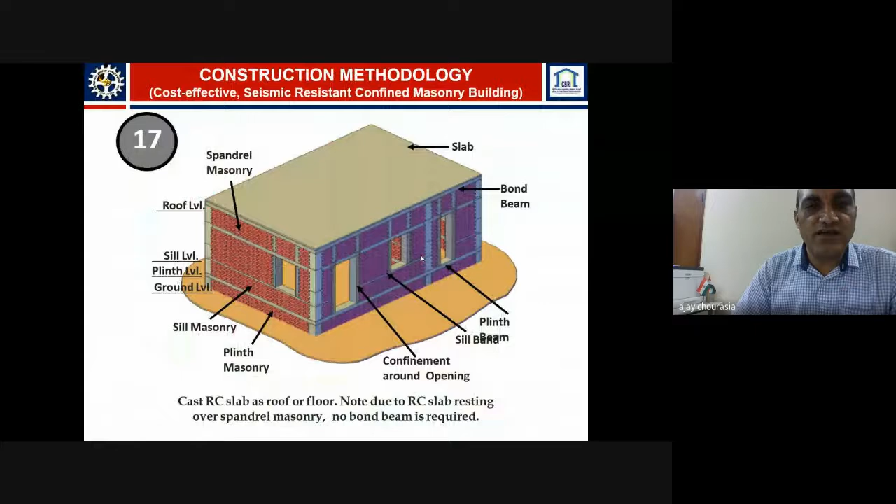Based on this investigation, we have developed design guidelines and procedures, and evaluated and proved that confined masonry is a promising technology that can be adopted even in high seismic zones of the country, that is seismic zone 5, up to 4-story, if constructed properly. This type of building technology can be adopted for low to medium rise construction.

Now, an important thing is comparison between the different popular systems. To have a better understanding from a techno-economical perspective, a comparison has been carried out between URM, RM, CM, and RCC frame structures with infill masonry, in terms of load path, behavior under vertical and lateral load, design effort, and earthquake vulnerability. In all perspectives, confined masonry proved again to have an edge over all existing technology.

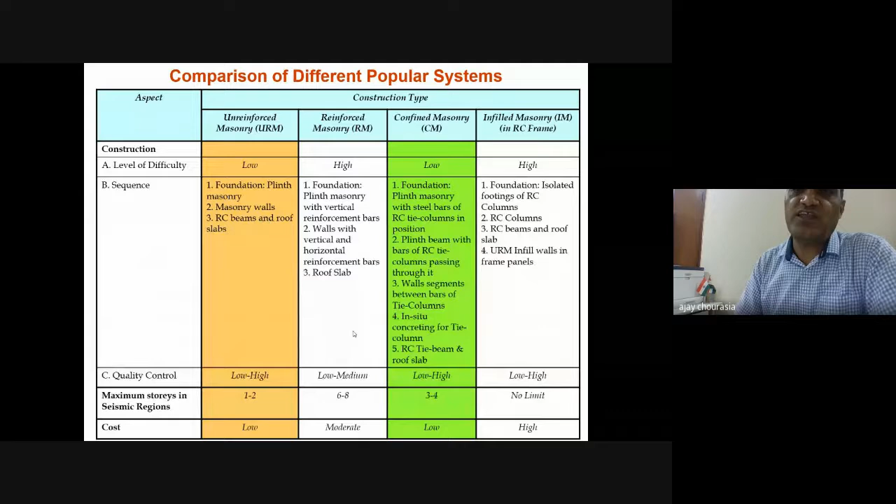Based on that, we have evolved a technical document on confined masonry, which is available on our CBRI website. Apart from that, to ease the construction process, particularly for EWS houses, we have created an atlas which embraces 25 different alternative architectural designs of EWS houses with structural design and detailing for confined masonry. It is classified into different sections, for 1-story, 2-story, and 3-story construction, and by seismic zone, so you can select the appropriate alternative as per your chosen architectural plan. Everything has been documented in this book on structural design and detailing for confined masonry of EWS houses.

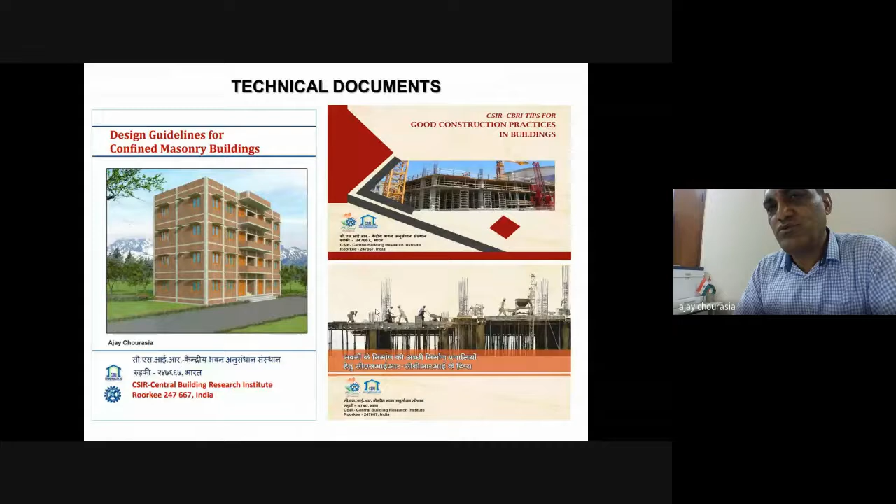Again, from an implementation point of view, to inculcate good construction practices day in and day out in the construction process, we have brought out good construction practices guidelines, which can also be downloaded from the CBRI website.

To conclude, I should say tremendous progress towards seismic safety has been made in the country. We are still a developing country, but we are not behind any developed country in terms of technical expertise, knowledge, and as far as the Indian seismic code is concerned.

As far as earthquake resistant design is concerned, we have to think again about these codes. Although they cater to new construction, it is definitely a great challenge for existing buildings. If they are vulnerable, not designed as per relevant standards, it calls for retrofitting, and for that purpose, all the alternative options spelled out in this presentation can be adopted for making existing seismically vulnerable buildings robust after retrofitting.

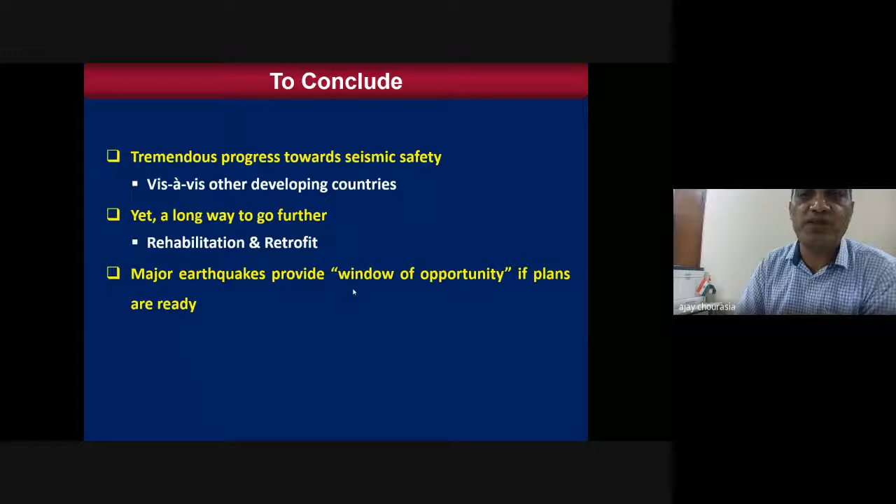We should always take all kinds of disasters as a window of opportunity, whether it is COVID or earthquake or any kind. For that purpose, we need to plan our things properly, construct the things, and maintain our structures properly. Then only will we achieve real life safety, serviceability, durability, and economical housing systems, because the truth is that earthquakes do not kill people. It is man, in his role as a builder or various other stakeholders, who kills people.

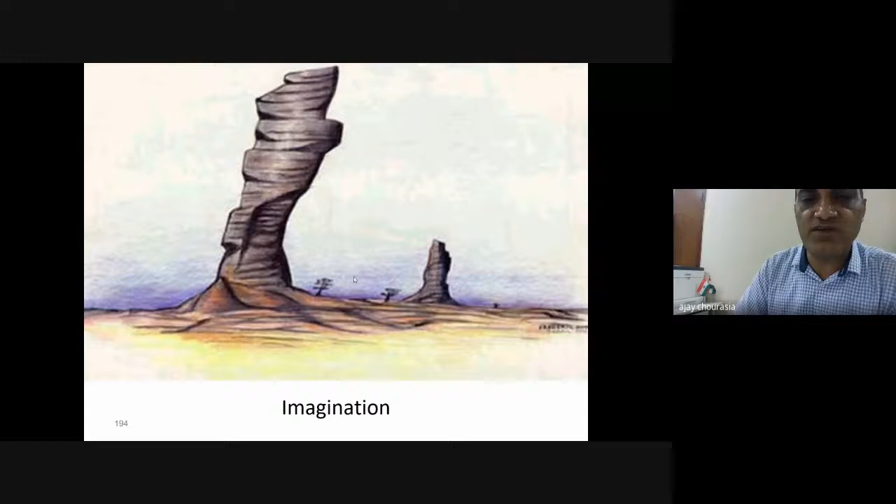When they can change, why not us? We can also change. But the only thing is, whatever you do, you have to keep in mind common sense.

So remember, we want to get civilized, modernized, globalized, but first we need to have safe, resilient, and robust structures. This is the journey through life, and this is how we have to give birth to the new generation also in terms of their technical competence.